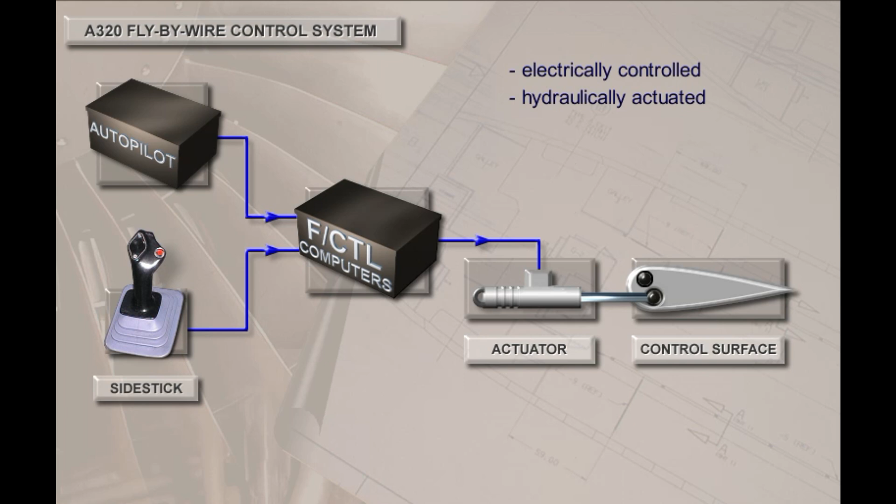Control surfaces on the A320 are conventional. Pitch control is achieved by two elevators mounted on a trimmable horizontal stabilizer. There are 5 spoiler panels and 1 aileron on each wing. Roll control is achieved by the ailerons and spoilers 2, 3, 4, and 5. In-flight speed brakes are provided by spoilers 2, 3, and 4, and ground spoilers are provided by all 5 spoiler panels on each wing. Yaw control is achieved by a one-piece rudder mounted on the vertical stabilizer.

The trimmable horizontal stabilizer, or THS, and the rudder, in addition to electrical control, are mechanically linked to cockpit controls to provide a means of controlling the aircraft should a temporary complete loss of electrical power occur.

Each wing has 2 trailing edge flap surfaces and 5 leading edge slat surfaces that act as lift augmentation devices for takeoff and landing.

The pitch trim wheels, flaps lever, speed brake lever, and rudder trim switch are located on the center pedestal. 2 sets of rudder pedals are located at each pilot station. Note, there is no aileron trim.

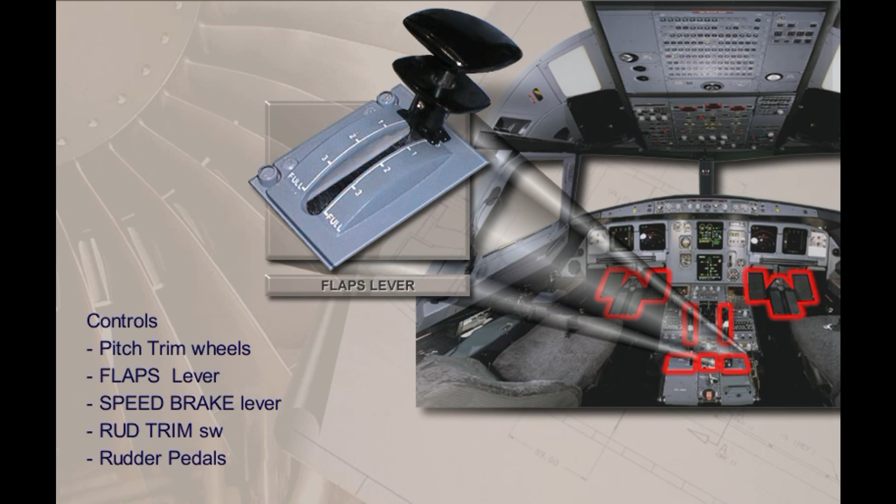The flaps and slats position indicator is found on the upper ECAM display unit. Additional flight control information is found in the memo section.

The traditional control column has been replaced by a side stick controller. The side stick, along with an auto trim system, enables the pilot to fly the aircraft more smoothly and with more precision and less effort, and provides a more comfortable ride for the passengers.

Inputs from the side stick or from the autopilot are processed by the flight control computers, which command the control surface actuators to move as necessary. This system enhances flight safety by providing complete protection against flight outside the normal flight envelope and protects against stall, wind shear, overstress, and overspeed.

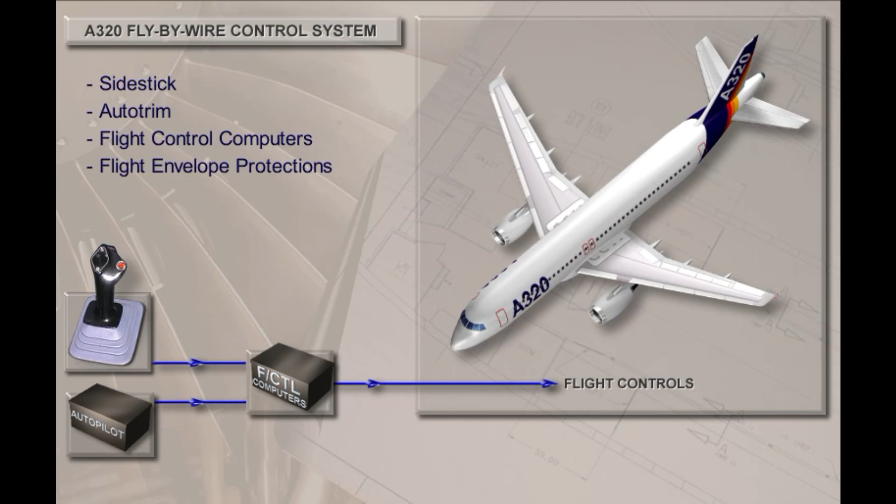The side stick controllers are located on the side consoles.

Flight control is achieved by 3 types of computers arranged to provide redundancy and failure protection. Different manufacturers, different hardware, and different software have been used to eliminate the potential for common errors. Electrical power sources are also from different electrical buses.

There are 2 elevator aileron computers, or ELACs, for elevator, stabilizer, and aileron control. 3 spoiler elevator computers, or SECs, for normal spoiler control and standby elevator and stabilizer control. 2 flight augmentation computers, or FACs, for electrical rudder control. 1 SEC, or 1 ELAC, is capable of controlling the aircraft in both the roll and pitch axis.

The electronic flight control switches are located on the left and right sides of the overhead panel.

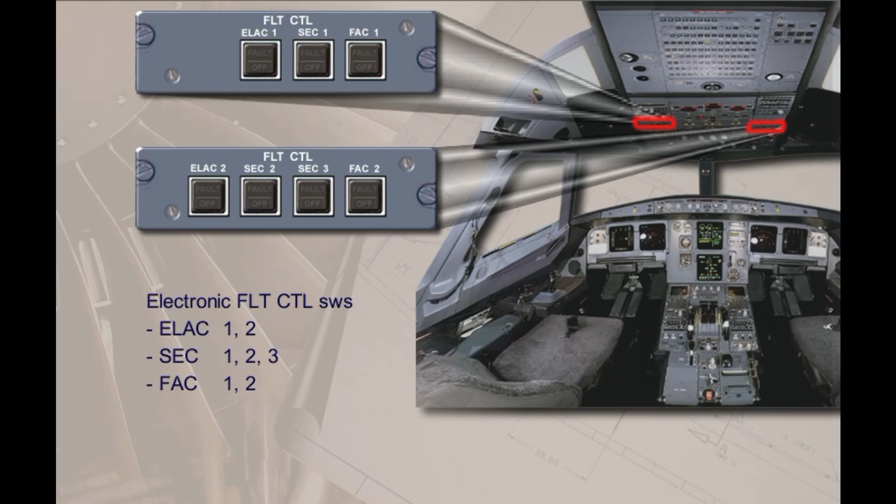The ECAM flight control page is displayed automatically with certain flight control faults and can be selected at any time with the flight control push-button switch on the ECAM control panel. The ECAM wheel page also duplicates the ground spoiler status.

Two side sticks allow the pilots to control the aircraft manually in both pitch and roll. They are not linked mechanically, but simultaneous inputs by the captain and first officer are summed. The sum is limited to the maximum deflection by a single side stick. It is very important, therefore, for both pilots to be clear about who has control of the aircraft.

There is no direct feedback or artificial feel system except for a simple spring centering device which neutralizes the side stick when it is released.

On the ground, after the first engine is running, the side stick position indicators come into view on the PFD. They disappear when the aircraft is airborne.

The white corner indices indicate the limit of side stick travel, while the white cross indicates the actual side stick order from both side sticks. This is useful for checking full side stick movement before takeoff, but does not indicate actual control surface position. For control checks, use the surface position indicators on the ECAM flight control page.

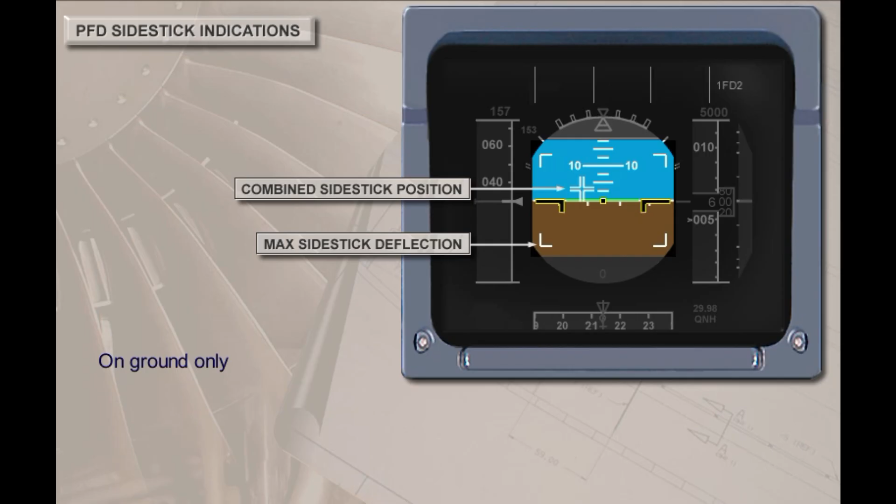The side stick has two switches, a dual-function autopilot disconnect priority takeover push button, and a communications push-to-talk switch.

Whenever the autopilot is engaged, a solenoid-operated detent locks the side stick in the neutral position. If necessary, the detent can be overridden with sufficient pressure to unlock the side stick, which will also disconnect the autopilot. The normal method to disconnect the autopilot, however, is to press the autopilot disconnect push button on the side stick.

A pilot can take full control and deactivate the other side stick by pressing and holding his priority takeover push button. If held for at least 40 seconds, the other side stick is latched out and the priority takeover push button can be released without losing priority. Each time a side stick priority is taken, an audio message, priority left or priority right, is heard.

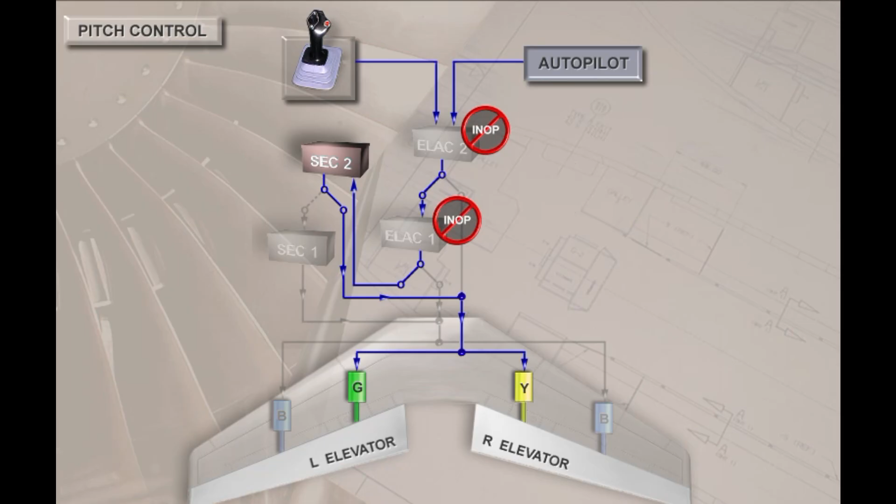The elevator position and hydraulic pressure indication is displayed on the ECAM flight control page. The hydraulic pressure indicator changes to amber when the associated actuator is not available due to hydraulic failure or jamming. The position indicator changes to amber when both actuators are unavailable. An amber partial box is displayed if the associated computer fails.

For pitch trim, the aircraft is equipped with a trimmable horizontal stabilizer, or THS. The THS is driven by two hydraulic motors, one powered by the green hydraulic system, the other by the yellow hydraulic system. For the auto pitch trim system, the hydraulic motors are driven by one of three electric motors, with the other two in standby.

Normally, ELAC 2 controls motor number 1. If ELAC 2 or any of its associated hydraulic systems or components fail, control automatically shifts to ELAC 1 and its associated hydraulic systems and components. If both ELAC 1 and 2 fail, control automatically shifts to SEC 2 or SEC 1, depending on the nature of the failure.

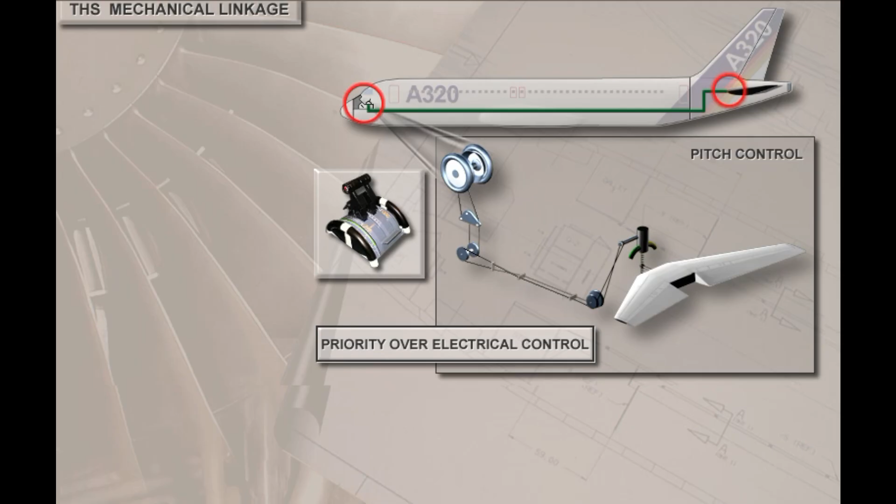With the failure of either the green or yellow hydraulic system, the trimmable horizontal stabilizer will operate at half speed with no adverse effects.

The trimmable horizontal stabilizer position is indicated on a scale next to the pitch trim wheel located on the center pedestal. The scale is painted green to indicate the normal takeoff range of 2.5 degrees nose down to 2.5 degrees nose up. The current setting is also displayed on the ECAM flight control page along with the hydraulic pressure indication, which changes to amber if hydraulic system pressure is low. The legend pitch trim changes to amber if the stabilizer is jammed.

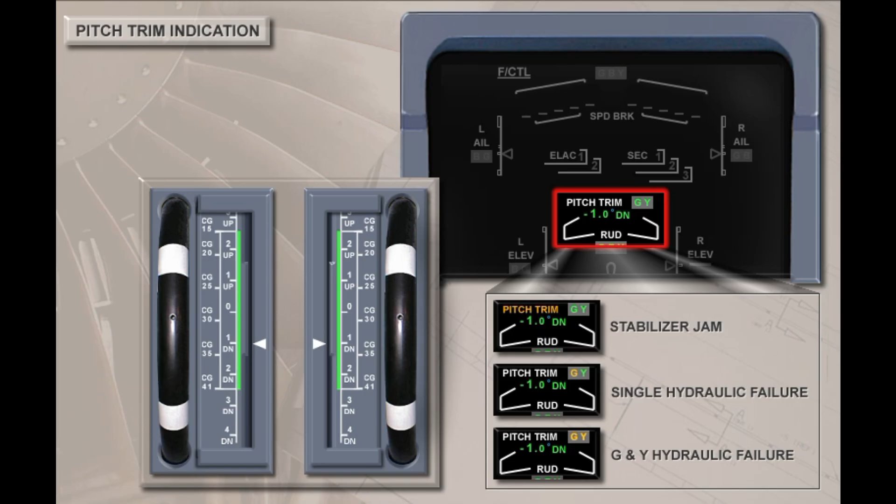One aileron and four flight spoilers on each wing provide roll control. Each aileron, as with the elevators, has two hydraulic actuators, each powered by a different hydraulic system and controlled by its associated ELAC. Normally, ELAC 1 and its associated actuators operate in active mode, while ELAC 2 and its associated actuators are in standby mode, ready to take over in the event of a failure.

Touch the ELAC 1 fail button or the right arrow to continue.

Each spoiler panel is positioned by a single servo jack and is powered by a combination of one of the three hydraulic systems and one of the three SECs.

If a SEC fails, control to its associated spoiler panel is lost and the spoilers are automatically retracted and hydraulically held down. If a hydraulic system failure occurs while a spoiler panel is extended, it will be blown down by aerodynamic forces.

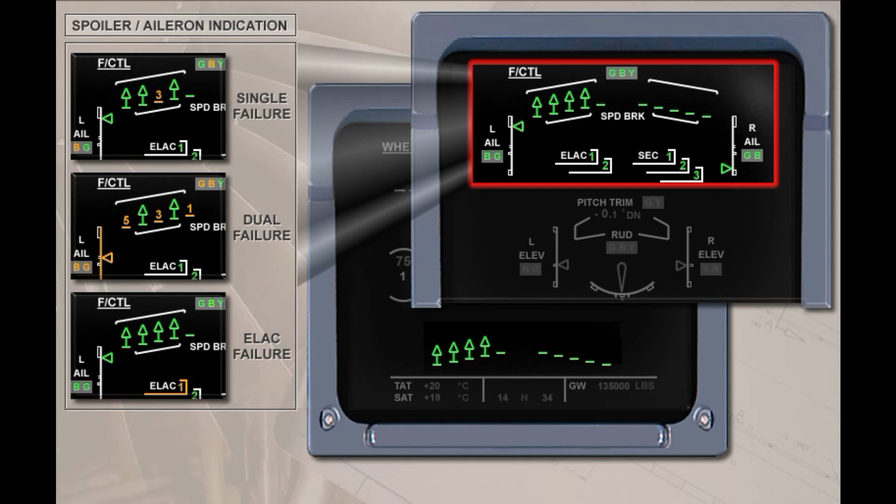Aileron and spoiler position indications are displayed on the ECAM flight control page. Spoiler indications are also repeated on the ECAM wheel page. A green arrow is displayed as soon as the spoiler panel is raised out of its retracted position. The hydraulic pressure indication turns amber if the hydraulic pressure is low or an actuator has jammed. An amber partial box is displayed if the associated computer fails or if the associated ELAC or SEC push-button switch is selected off.

Yaw control is provided by a single rudder panel driven by 3 independent hydraulic jacks operating in parallel. ELAC 1 computes yaw damping and turn coordination orders from the side stick, autopilot, or rudder pedals, and transmits these orders to FAC 1. FAC1 controls an actuator powered by the green hydraulic system, which in turn drives all 3 rudder hydraulic jacks. FAC2, along with a yellow actuator, operates in standby mode, ready to take over in case of a failure. There is no feedback to the rudder pedals from the yaw damping and turn coordination functions.

The 2 sets of rudder pedals are mechanically linked to each other and to the rudder itself, and are available in manual flight for takeoff, landing, and engine-out flight. Rudder and rudder pedal deflection is limited by the FACs as a function of aircraft speed to prevent overstressing of the airframe at high speeds.

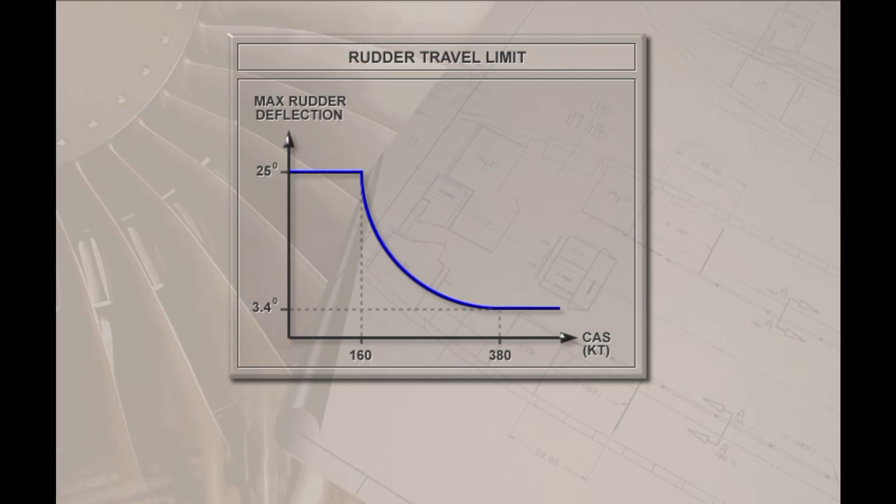Rudder trim is provided by 2 motors, one driven by FAC1, the other by FAC2. Normally, motor 1 is active, with motor 2 in standby. In manual flight with the autopilot off, rudder trim is applied with the rudder trim switch located on the pedestal, and is normally only used when an engine failure occurs. Using rudder trim causes displacement of the rudder pedals. A reset button allows the trim to be reset to 0. Note, with the autopilot engaged, the rudder trim rotary switch and rudder trim reset push button are not active.

Rudder position is displayed on the ECAM flight control page. The hydraulic indicator changes to amber with a hydraulic system failure. The rudder symbol and scale become amber if all 3 hydraulic systems pressures are low. The rudder trim position, normally blue, changes to amber if the rudder trim reset fails. The rudder travel limiter high-speed limits are displayed.

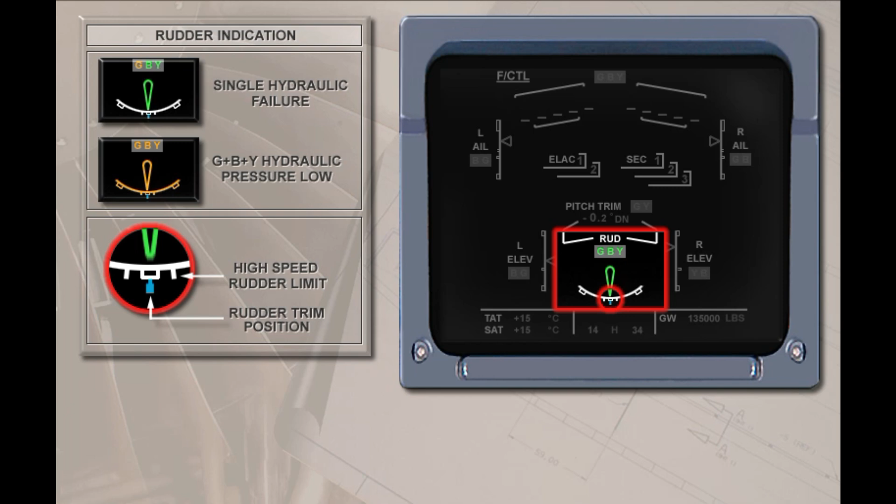Spoiler panels 2, 3, and 4 act as speed brakes in flight. However, the roll control function of the spoiler panels always has priority, and speed brakes may retract to satisfy a roll order. Spoiler panel 2 max deflection is half that of spoiler panels 3 and 4. Speed brakes are selected by pushing down and then moving the speed brake lever aft to the desired position. There is a detent at the half position. The speed brakes will not extend if the flaps are in config full, and if extended, will retract when config full is selected. Touch the speed brake lever to see the operation of the speed brakes.

The speed brakes are also inhibited if SEC 1 and SEC 3 both have faults, or angle of attack protection is active. If an elevator has a fault, spoilers 3 and 4 will be inhibited.

When the aircraft is flying faster than 315 knots, or Mach 0.75, and the autopilot is engaged, the speed brake retraction rate is reduced. It takes from about 25 seconds to 50 seconds for the speed brakes to retract, depending on aircraft modifications. On some aircraft, again depending on aircraft modification, when the autopilot is engaged, max speed brake panel deflection is reduced and is achieved with half speed brake lever selection.

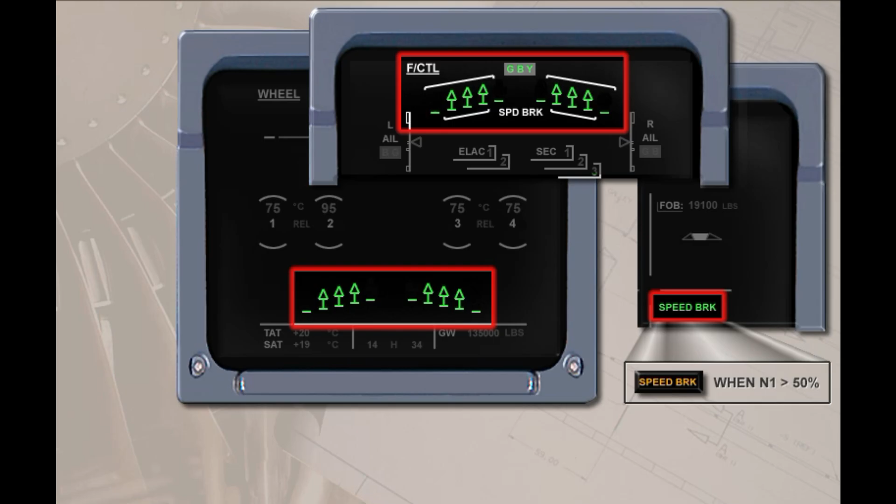All 5 spoiler panels act as ground spoilers. They are armed for takeoff and landing by raising the speed brake lever straight up into the armed position. The message ground spoilers armed appears on the upper ECAM.

The ground spoilers, when armed, extend automatically during a rejected takeoff when the aircraft speed is greater than 72 knots and both thrust levers are reduced to idle. On landing, the ground spoilers extend when both main landing gear touch down and the thrust levers are set to idle. If the ground spoilers were not armed for landing, they will extend automatically after both main gear have touched down when at least one engine is selected to reverse and the other is at idle.

On some aircraft, depending on modification, the ground spoilers will partially extend when reverse is selected on at least one engine and only one main landing gear strut is compressed. For example, in a crosswind landing, if the upwind gear touches down first and reverse is selected, the ground spoilers will partially extend to ease the other landing gear onto the runway. Consequently, full ground spoiler extension will occur.

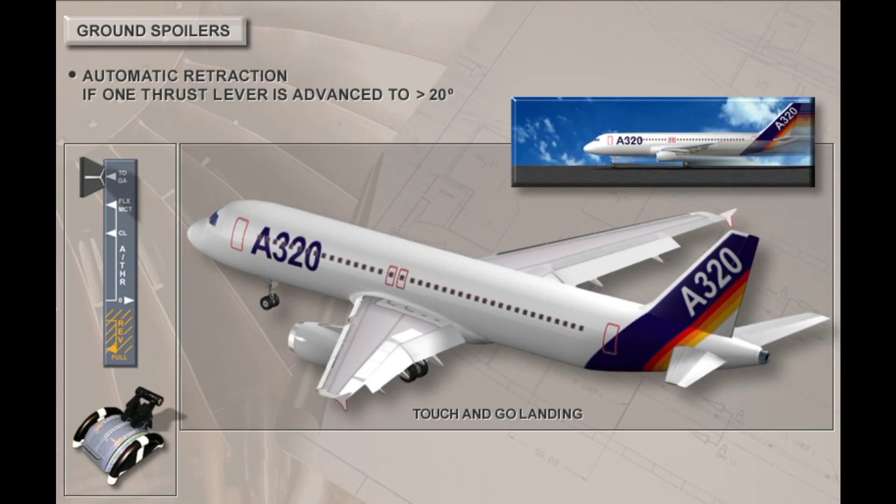When the ground spoilers extend, the speed brake lever does not move. The only visual indication that they have extended is on the lower ECAM wheel page, which was automatically displayed for landing or in the event of a rejected takeoff.

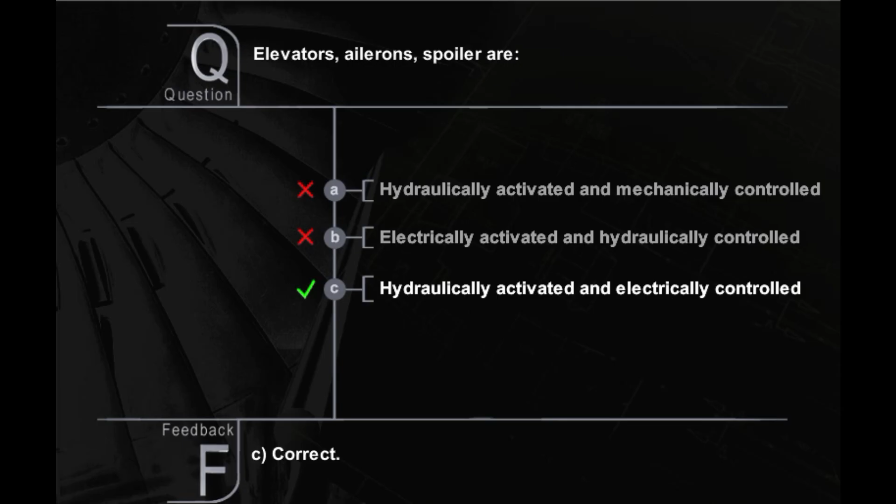Each wing has 5 leading edge slat surfaces and 2 trailing edge flap surfaces. Slats and flaps are selected by a single flaps lever located on the center pedestal. Touch the flaps lever to select full flaps.

Two dual-channel slat flap control computers, or SFCCs, monitor and control the slats and flaps. When a flap selection is made with the flaps lever, a signal is sent to the SFCCs, which in turn control the slats and flaps power control units, or PCUs. Each SFCC controls and monitors one motor of the flap PCU and one motor of the slat PCU. These hydraulic motors, through a mechanical system of shafts, gearboxes, and actuators, move the slats and flaps to the desired position. When the slats and flaps have reached their selected position, pressure off brakes, or POBs, lock the hydraulic motors to prevent unwanted movement.

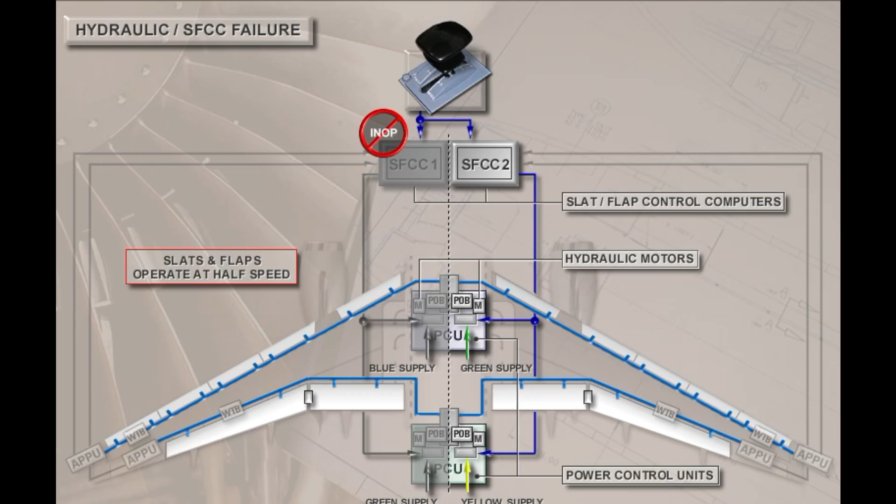The SFCCs continuously monitor asymmetry position pickoff units, or APPUs, and feedback position pickoff units, or FPPUs, which measure slat and flap position for asymmetry, runaway, uncommanded movement, and other failure conditions. If both SFCCs detect a failure, the wingtip brakes, or WTBs, lock the slats, or flaps position, and send a warning to the ECAM. Wingtip brakes, once activated, can only be reset on the ground.

Two indication position pickoff units, or IPPUs, one for the slats and one for the flaps, send position data to the upper ECAM slats flaps position indicator.

There is an interconnecting strut with flap attachment failure detection sensors between the inboard and outboard flaps. If a position difference is sensed, a signal is sent to one of the landing gear control interface units, or LGCIUs, and the movement of the flaps is stopped by the pressure on brakes.

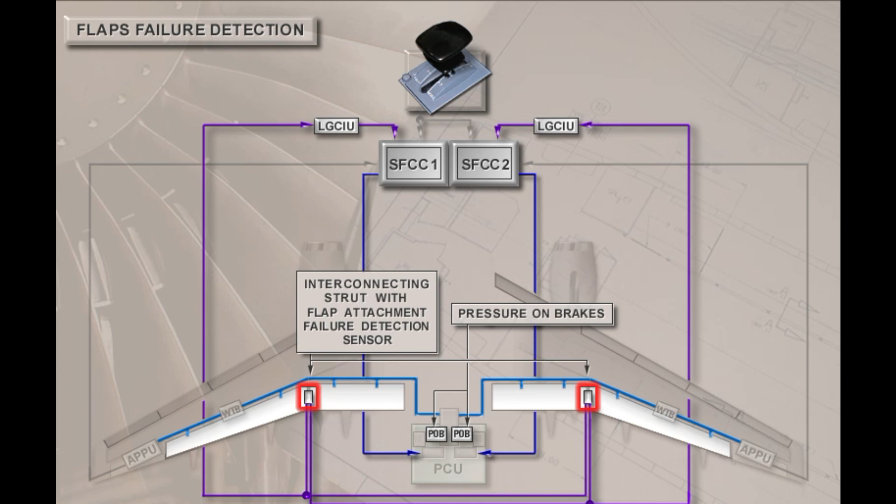The flaps lever has 5 detents, 0, 1, 2, 3, and full, corresponding to the different slat flap configurations. Below the flap lever knob is a collar, which must be lifted in order to move the lever out of each detent. There is an internal balk between positions 1 and 2, and between positions 3 and full.

To move past a balk, the collar must be released, then squeezed again, preventing an excessive one-movement selection from full in the event of a go-around, and from 2 to 0 during normal retraction.

The flap indicator on the upper ECAM uses the shape of the wing to display slat flap configuration. A gray symbol represents the fixed wing center section, and the slats and flaps are represented by green triangles on either end of the wing.

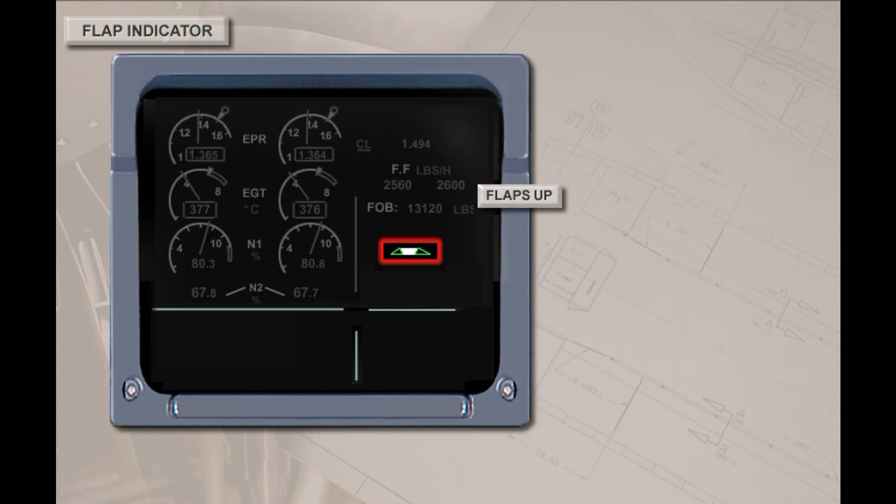With the first flap selection, white dots and an S and F appear to show the possible slat flap configurations. The legend flap and the selected flap lever position is displayed in cyan, and small cyan triangles move out to the selected position. When the slats flaps reach their new position, the flap legend changes from cyan to white. The selected flaps lever position changes from cyan to green, and the cyan triangles are replaced with green position indicators.

The chart shows the possible slat flap configurations. When config 1 is selected for takeoff on the ground, both slats and flaps extend. When config 1 is selected in flight, only the slats extend, and the flaps will then extend when the lever is selected to the config 2 position.

After takeoff with config 1 plus F, the flaps only will automatically retract at 210 knots to prevent exceeding the max flap extension speed of 215 knots. This may occur at high aircraft gross weights where the slat retraction speed is close to 210 knots. After an automatic retraction, automatic re-extension does not occur if the speed again drops below 210 knots.

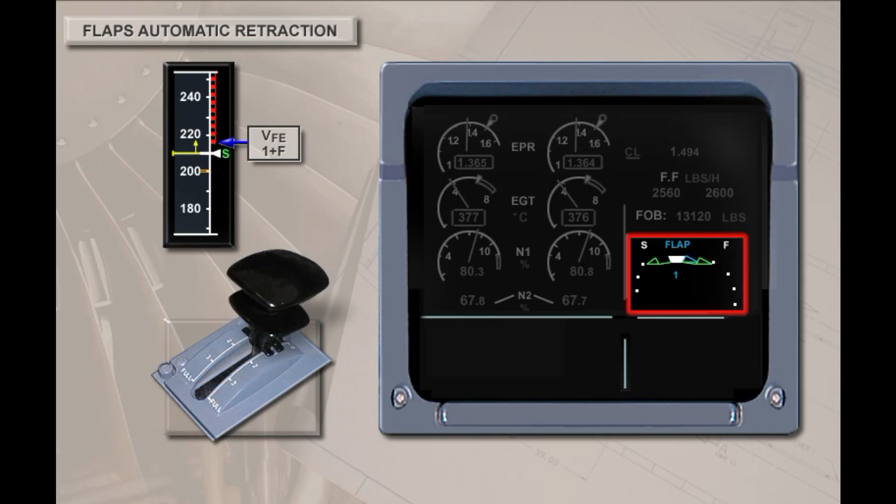When the flaps are extended, the ailerons droop 5 degrees. This position is indicated on the ECAM by an index on the aileron scale.

If both associated hydraulic systems are inoperative, or there is a fault in the slats or flaps, the flap legend and the position indicators change to amber. The slats locked message or the flaps locked message is displayed along with an ECAM caution when the wingtip brakes are engaged or when there is an asymmetry condition between the slats or flaps.

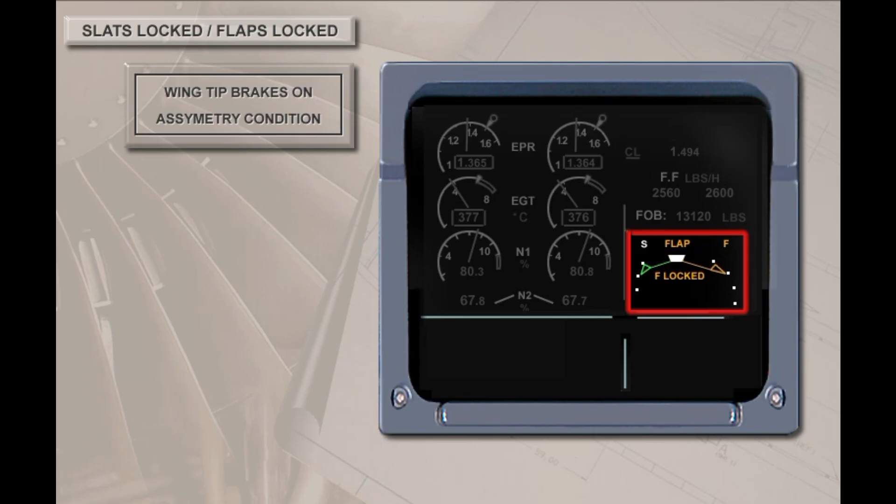An alpha speed lock function prevents slat retraction at high angles of attack and low speeds to guard against stall. If angle of attack exceeds 8.5 degrees or the airspeed is less than 148 knots, slat retraction from position 1 to 0 is inhibited. When the flaps lever is moved from 1 to 0 under these conditions, the flaps only will retract. The slats will eventually retract when the speed increases to VLS for config 0. Note, slats do not automatically extend if angle of attack is exceeded or if airspeed falls below 148 knots.

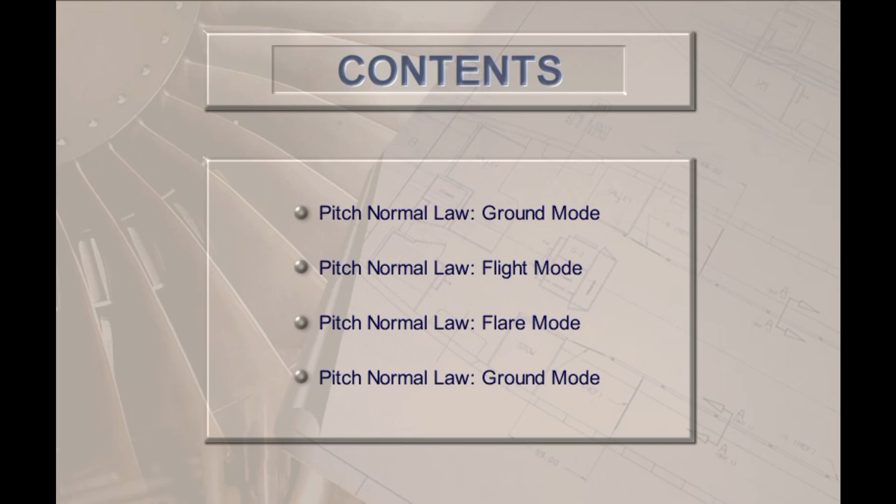All aircraft fitted with fly-by-wire control systems have within the flight control computers control laws which determine how the aircraft's flight control surfaces should be positioned at any given time.

On the A320, normal law is active when all flight control surfaces function, even after certain flight control computer, hydraulic, or electrical faults. Protections are provided in flight, including load factor limitation, pitch attitude protection, angle of attack protection, high speed protection, bank angle protection, low energy warning, and load alleviation protection. Normal law encompasses 3 modes: ground mode, flight mode, and flare mode.

On the ground, because sophisticated protections are not required, elevator deflection is in direct proportion to side stick movement. Auto trim is not functional, allowing the pilots to set the trimmable horizontal stabilizer manually for takeoff to adjust for C of G variations.

Ground mode allows the elevators to move to the max deflection of 30 degrees nose up and 15 degrees nose down in order to perform the pre-flight control check. Upon reaching 70 knots during the takeoff roll, max nose up elevator deflection is reduced to 20 degrees to prevent the possibility of a tail strike at rotation.

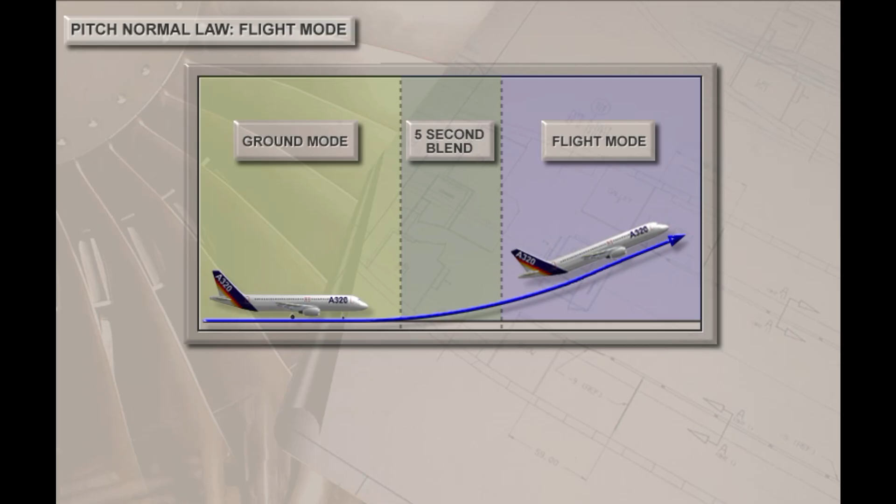In pitch normal law, movement of the side stick either fore or aft results in a load factor demand or constant G maneuver rather than a directly proportional elevator displacement. With the side stick in the neutral position, the pitch demand is always to maintain a constant 1G. If the aircraft is disturbed due to atmospheric influences, for example, it will always attempt to return to its original pitch attitude and 1G. A conventional aircraft, once disturbed, would continue to diverge from its original flight path, at least in the short term.

Moving the side stick aft results in a demand greater than 1G or positive G, and moving it forward results in a demand for less than 1G or negative G. Once the aircraft is established in the desired attitude, the side stick can be released to its neutral position, and the aircraft will continue to maintain the new attitude and 1G. Control inputs are made to alter or change the flight path, not to maintain it. Therefore, a side stick input can be considered as a selected vector through space.

In normal law, pitch trim is automatic. With prolonged side stick input, the trimmable horizontal stabilizer is automatically trimmed to bring elevator deflection back to zero. Also, with the side stick in neutral, power, speed, or configuration changes are automatically trimmed out to maintain a constant 1G. The aircraft will decelerate or accelerate in level flight with no pilot input, all the while maintaining 1G. Without auto trim, the aircraft would pitch up or down just as it does in a conventional aircraft.

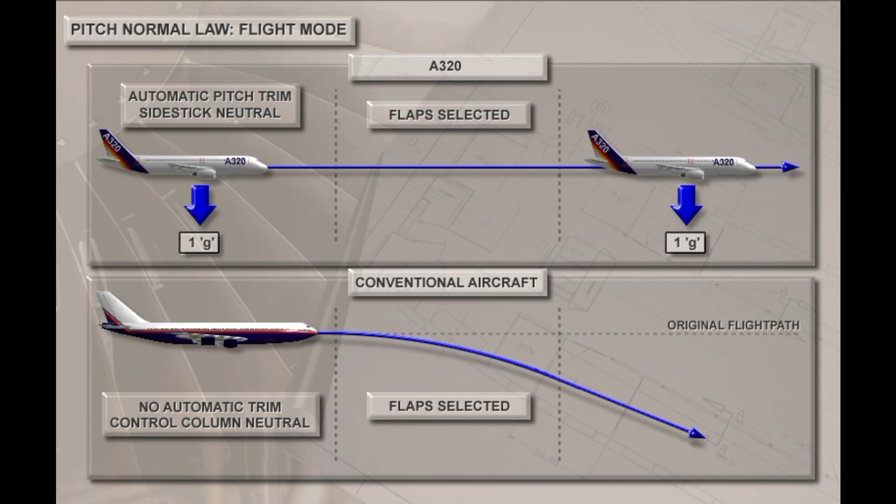In a turn of up to 33 degrees of bank, the pilot does not have to hold back pressure on the side stick to maintain altitude. Once the turn is established, the side stick can be released to neutral.

As the aircraft descends through 50 feet for landing, flight mode changes to flare mode, a modified form of pitch normal law. The aircraft memorizes the pitch attitude at 50 feet, then at 30 feet, begins to progressively reduce the pitch attitude to -2 degrees over a period of 8 seconds. The auto trim is also deactivated. This simulates the behavior of a conventional aircraft as it becomes influenced by ground effect and means that the pilot must apply a conventional flare technique, moving the side stick aft to achieve the correct landing attitude for touchdown.

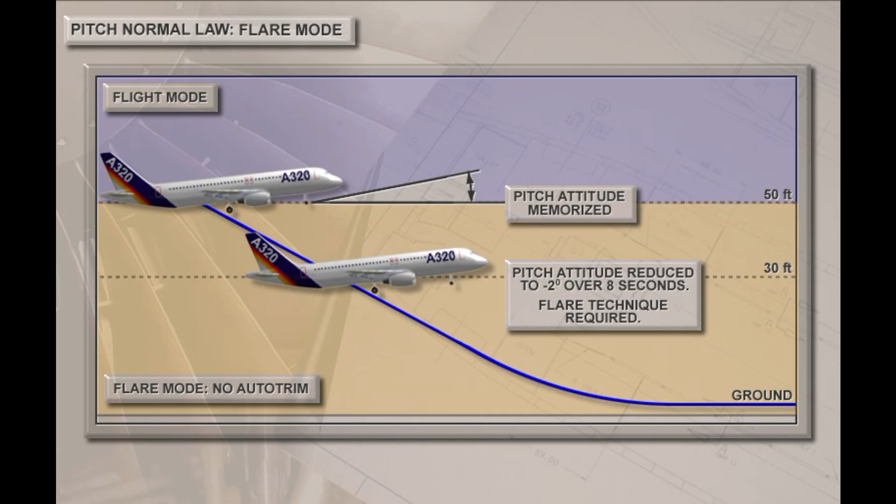If a go-around is attempted below 50 feet, flight mode and therefore auto trim would not be restored until reaching 50 feet, and more than normal pitch force may be required to pull the aircraft up to and maintain the go-around attitude.

Upon touchdown, elevator deflection is again restored to a direct elevator-side stick relationship. 5 seconds after touchdown, the trimmable horizontal stabilizer is automatically reset to 0 degrees.

In pitch normal law, side stick inputs are filtered through a limiter, which will restrict the nose up or nose down demands to maintain the aircraft within its structural design limits at all times. The load factor is limited to plus 2.5 Gs to minus 1 G with the flaps retracted. With the flaps extended, load factor is limited to plus 2 Gs to 0 G.

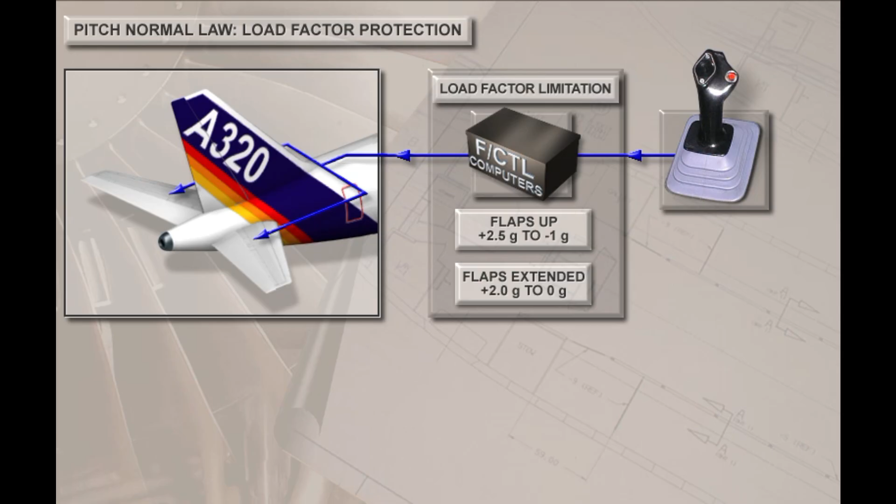Load factor is momentarily displayed on the lower ECAM whenever the G load is above 1.4 Gs or below 0.7 G.

Pitch attitude is limited to a maximum of 30 degrees nose up in config 0 to 3, progressively reduced to 25 degrees at low speed, and with the flaps in the full position is limited to 25 degrees nose up, progressively reduced to 20 degrees at low speed. Nose down pitch attitude is limited to minus 15 degrees. These limits were chosen to avoid entering the angle of attack and high-speed protection envelopes, which will be covered later.

If flying at the nose-up limitation, pulling back further on the side stick has no effect, however full nose-down demands are still available. At the nose-down limitation, the reverse is true: pushing further on the side stick would have no effect, but full nose-up authority is available.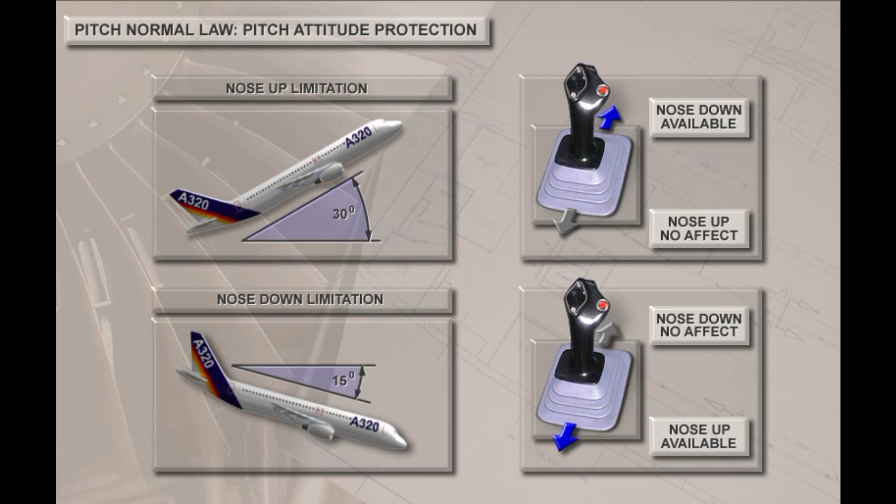Pitch attitude limits are displayed on the PFD as small green horizontal bars. As well, a large red arrow pointing downward is displayed at the nose-up limit. The flight director bars disappear from the PFD when pitch attitude exceeds 25 degrees nose up or 13 degrees nose down.

At the low end of the speed scale, an aircraft may reach an angle of attack at which max lift is attained. This is defined as max coefficient of lift, or alpha CL max. At higher angles of attack, lift is reduced and the aircraft will eventually stall. Conventional aircraft utilize systems such as stick shakers or stick pushers to give pilots warning of an impending stall.

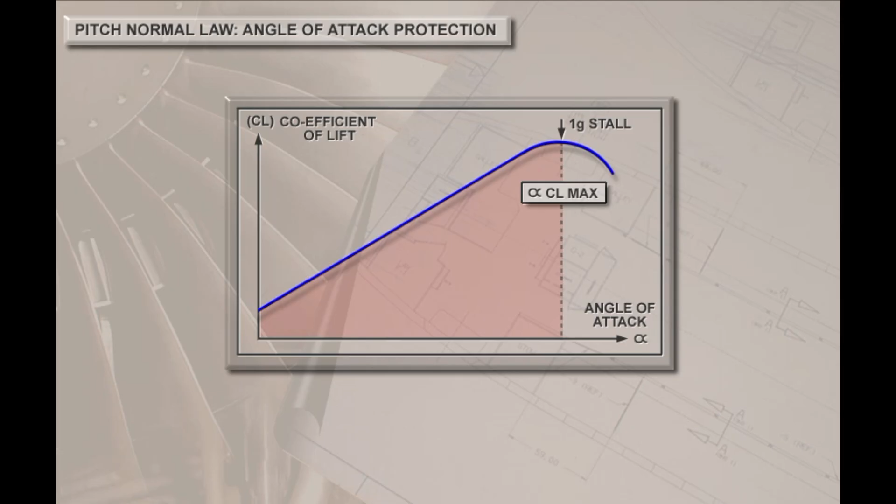When the A320 reaches an angle of attack defined as alpha protection or alpha prot, the side stick controller, rather than demanding a load factor, switches to a protection mode in which it directly demands angle of attack. At an angle of attack of alpha prot plus 1 degree, the autopilot will disengage.

The second level of protection is that, at alpha floor, a speed slightly lower than alpha prot, TOGA thrust is automatically applied, regardless of thrust lever position or whether the auto thrust is engaged. Alpha floor is enunciated on the FMA.

The third level of protection is that the angle of attack will not be allowed to exceed alpha max, even if the pilot pulls the side stick all the way back. It is safe, therefore, if required for wind shear or terrain clearance maneuvers, to rapidly pull the side stick fully back, even at low speeds.

The load factor limitation still applies. If the side stick is released, the angle of attack returns to alpha prot and stays there. Alpha prot, alpha floor, and alpha max are computed by the flight augmentation computers or FACs and vary depending on aircraft weight, configuration, and C of G.

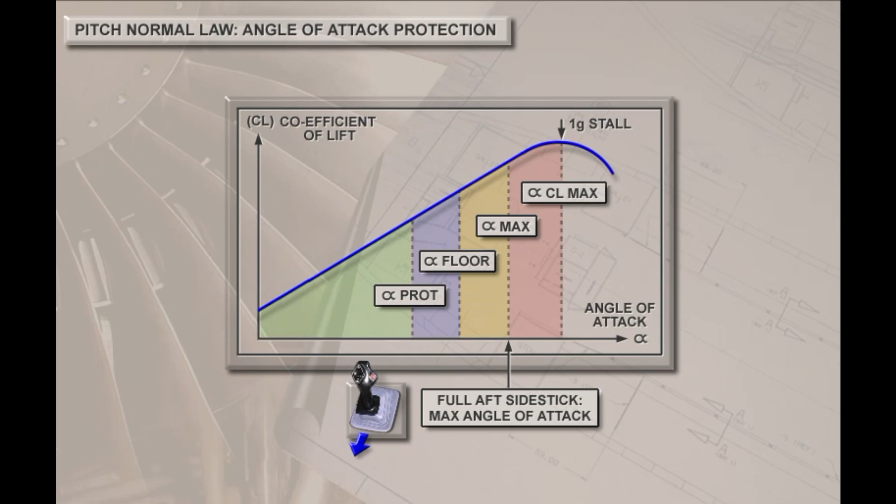To exit alpha protection, the side stick must be pushed forward. When the aircraft exits alpha floor conditions, alpha floor will be replaced by the message TOGA LOCK on the FMA. To cancel TOGA LOCK, the auto thrust must be disconnected by pressing the auto thrust disconnect push button or the auto thrust push button on the FCU panel. Then, bring the thrust levers back into the auto thrust operating range and rearm the auto thrust by pressing the auto thrust push button on the FCU panel.

On the PFD speed scale, alpha prot is represented by the top end of the black and amber strip, while alpha max is represented by the top of the red strip. VLS is the lowest selectable speed, which can be selected by the pilot with the speed select knob on the FCU and represents 1.28 times Vstall in the clean configuration. It provides a buffer against reaching alpha prot. With auto thrust engaged, the speed will not normally be allowed to fall below VLS.

Angle of attack protection is also available at high altitude and high speed, where it gives protection at the buffet boundary. At altitudes higher than optimum, for a given weight, the spread between alpha prot and actual aircraft speed can be quite small.

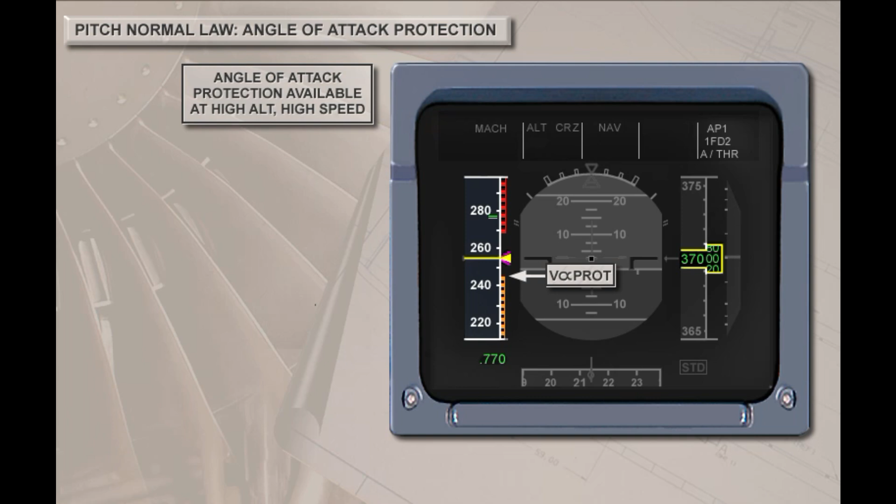The high-speed protection system will not allow the aircraft to exceed its design limit speed of 383 knots, Mach 0.89. At VMO, max operating speed in level flight plus 6 knots, or MMO plus 0.01, the autopilot disconnects, and a nose-up load factor demand is introduced to allow the aircraft to return to the normal speed envelope.

VMO, MMO is indicated on the PFD speed scale by a red and black strip, and the high-speed protection symbol is indicated by a pair of green horizontal bars.

If the pilot gently applies full forward side stick input and holds it there, the speed will stabilize at a maximum of VMO plus 16 knots, or MMO to MMO plus 0.04. If he suddenly applies full forward side stick and holds it there, the speed may momentarily increase to a limit of VMO plus 30 knots, then will stabilize at VMO plus 16 knots. If the stick is released to neutral, the speed will stabilize at VMO or MMO.

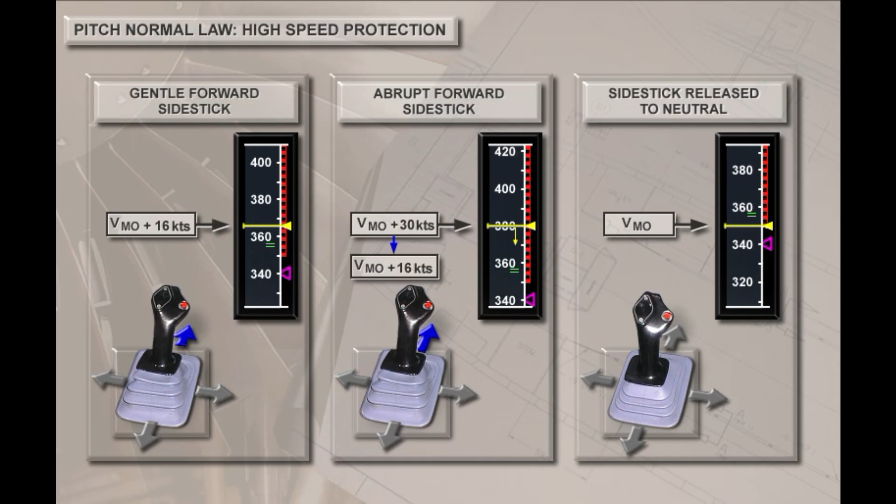When high-speed protection is active, the autopilot disconnects, and the horizontal stabilizer stops auto-trimming, with only elevator used to bring the aircraft back to within the normal speed envelope.

When the aircraft enters the high-speed protection area, an overspeed warning is generated to ECAM, the continuous repetitive chime is heard, and the master warning flashes. The autopilot off warning is also displayed if the autopilot was on.

Between 2,000 feet and 100 feet, with flaps in config 2, 3, or full, the low-energy warning is triggered if the aircraft speed drops below a threshold where power must be increased to maintain the flight profile. The oral warning, speed, speed, speed, is repeated every 5 seconds.

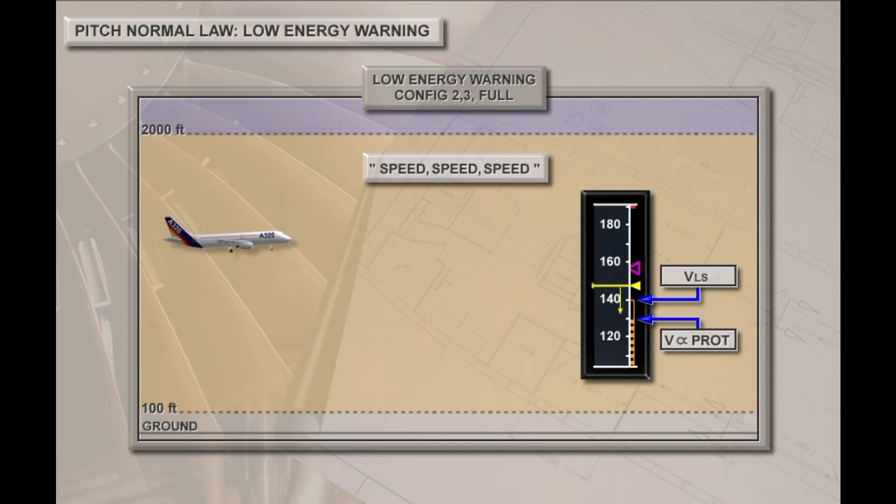Moving the thrust levers forward of the climb detent up to the MCT detent will allow the thrust to increase in order to recover small decreases in speed. This action deactivates the auto thrust, although it remains armed, and gives an immediate burst of power. Once the speed is recovered, bringing the thrust levers back to the climb detent will reactivate the auto thrust. If necessary, move the thrust levers to the toga position to initiate a go-around.

The transition from ground to flight mode occurs 1/2 second after the aircraft becomes airborne. In flight, the side stick demands a roll rate rather than a direct aileron spoiler deflection. The rate of roll is proportional to the amount of lateral side stick input, with a maximum rate of 15 degrees per second if held to the stop.

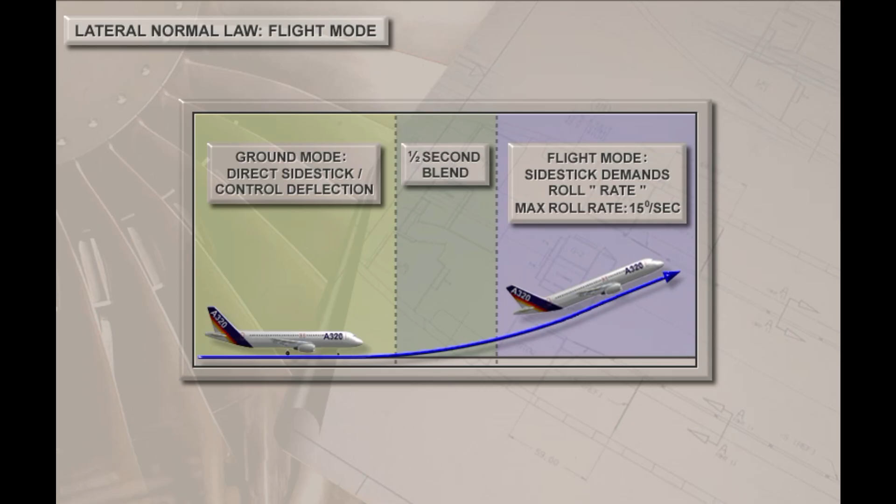The lateral normal law is combined roll and yaw law. Thus, a side stick input mixes orders to the ailerons, spoilers, and yaw damper.

The side stick also gives a bank angle demand when it is released to neutral. Stick neutral is a demand for zero roll rate. Thus, in a bank of up to 33 degrees, the aircraft will maintain the bank angle at the time the stick was released. Also, feedback to the pitch normal law is made, such that up to 33 degrees of bank, an increased G demand is made to compensate for the bank angle, and no additional back pressure is necessary on the side stick while in the turn.

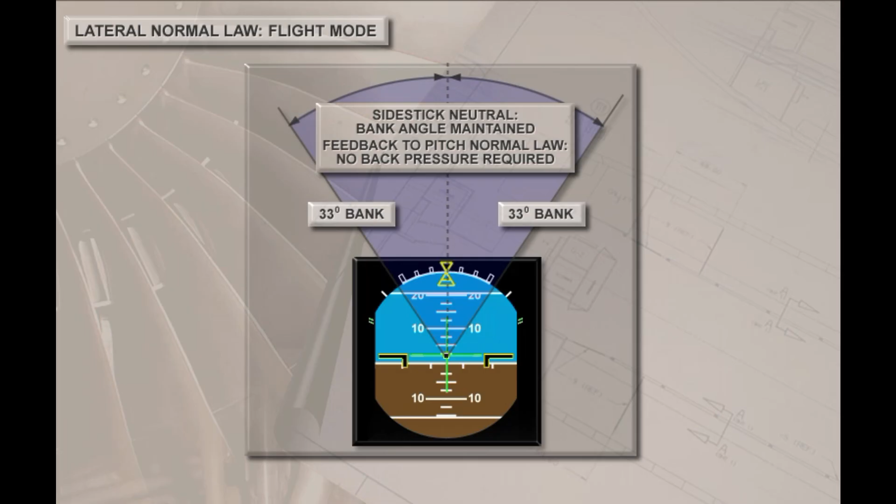If the rudder pedals are depressed when the side stick is in the neutral position, the lateral controls attempt to zero the roll rate, and a side slip is automatically performed. The aircraft trajectory does not change significantly. This is an important technique for crosswind landings.

In the engine failure case, if the side stick is left in neutral, the aircraft attempts to zero the induced roll rate by automatically displacing the ailerons, spoilers, and rudder. However, a slow heading drift will occur as the aircraft rolls and yaws in response to the engine failure, and pilot action on the rudder pedals is required to stop the heading drift and bring the aircraft back to the ideal state of side slip. That is, wings level, ailerons and spoilers neutral, with rudder displacement only.

To assist the pilot, a side slip target indicator is available on the PFD. The color changes from yellow to blue, with flaps at 1, 2, or 3. Pilot response is instinctive, as with a conventional slip ball, step on the target to align it with the roll index.

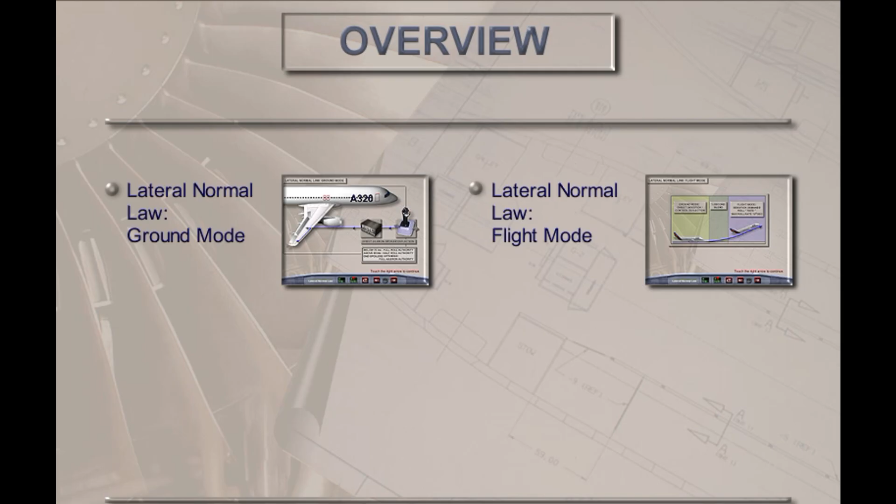The maximum bank angle that can be achieved is 67 degrees. Full lateral side stick must be applied and held. If the side stick is released, the aircraft will return to and maintain 33 degrees of bank. Beyond 33 degrees of bank, there is no pitch compensation. Aft control inputs would be required, as in a conventional aircraft, to maintain the desired pitch angle.

The max bank angle of 67 degrees is indicated on the PFD by a pair of green bars. When the bank angle exceeds 45 degrees, the flight director bars disappear. The bank angle limitation of 67 degrees corresponds to the design G factor limitation of 2.5 Gs. With flaps extended, the bank angle is limited to 60 degrees in level flight to correspond with the design factor limitation with flaps extended of 2 Gs.

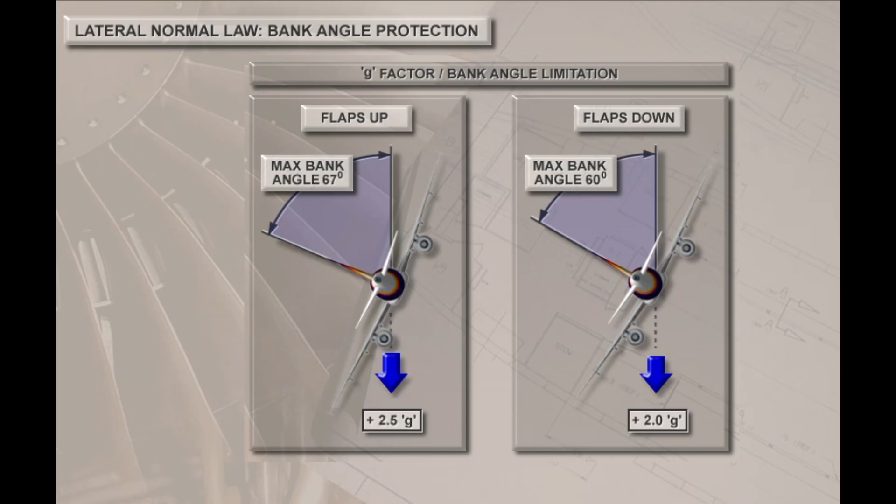When high speed or angle of attack protection is active, the maximum angle of bank is limited to 45 degrees. If the side stick is released to neutral, the aircraft will return to and maintain wings level.

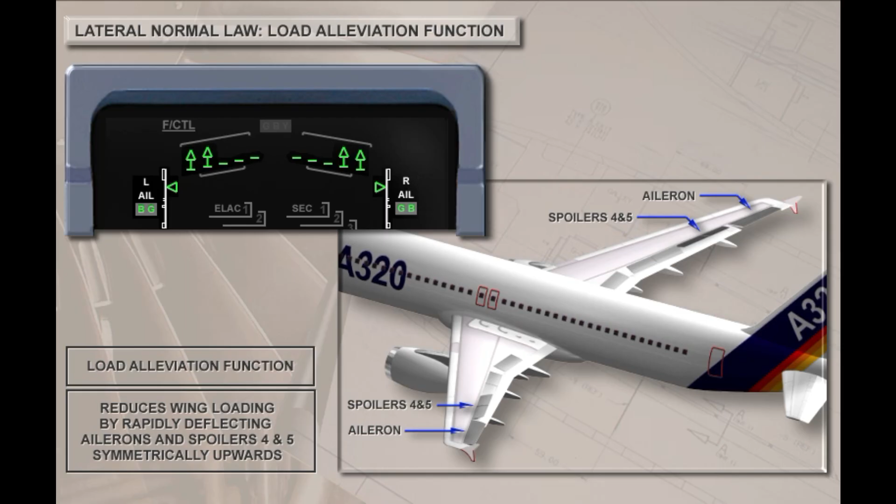The load alleviation function, or LAF, reduces wing structure loads in conditions of turbulence by rapidly deflecting the ailerons and spoilers 4 and 5 symmetrically upwards when the aircraft load factor differs by 0.3 G compared to aircraft demanded load. To assist with the high hydraulic demands required, dedicated hydraulic accumulators are installed near the associated controls. LAF is inhibited with slats or flaps extended below 200 knots or above VMO plus 10 knots.

The load alleviation function operates in a degraded mode with associated failures. The LAF degraded message appears on the ECAM flight control page. With a total loss of the load alleviation function, LAF is displayed in the INOP Systems column on the ECAM status page.

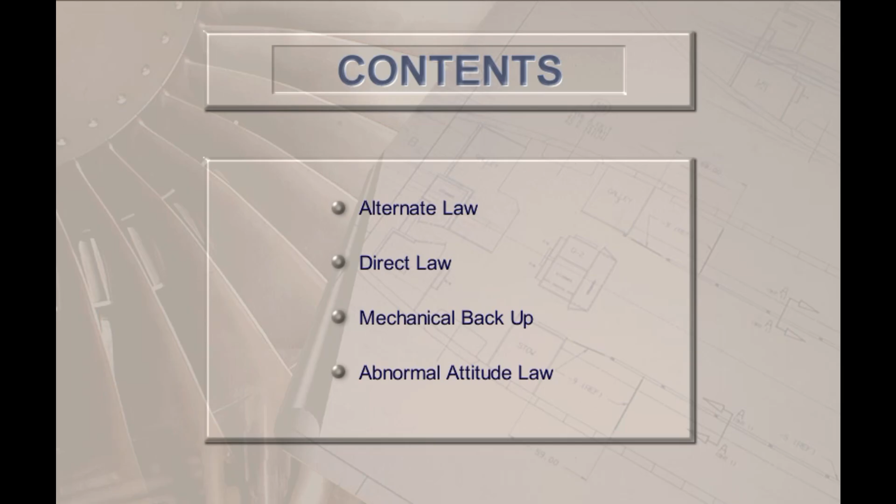With certain hydraulic system failures, control surface failures, or electronic flight control system, inertial reference, and/or air data computer failures, normal law characteristics and protections may be reduced or lost, and the aircraft will revert to alternate law. Therefore, it is imperative that the pilot fly the aircraft more attentively to avoid exceeding normal flight parameters. ECAM will advise the pilot whenever alternate law is active. The autopilot may or may not be available, depending on the nature of the failure.

In pitch alternate law, as in normal law, the side stick still demands a G maneuver and auto trim is still available. Thus, pitch control in alternate law is very similar to normal law. However, the only protection available is the load factor limitation. With no pitch attitude protection, amber X's replace the double green pitch attitude limit bars on the PFD.

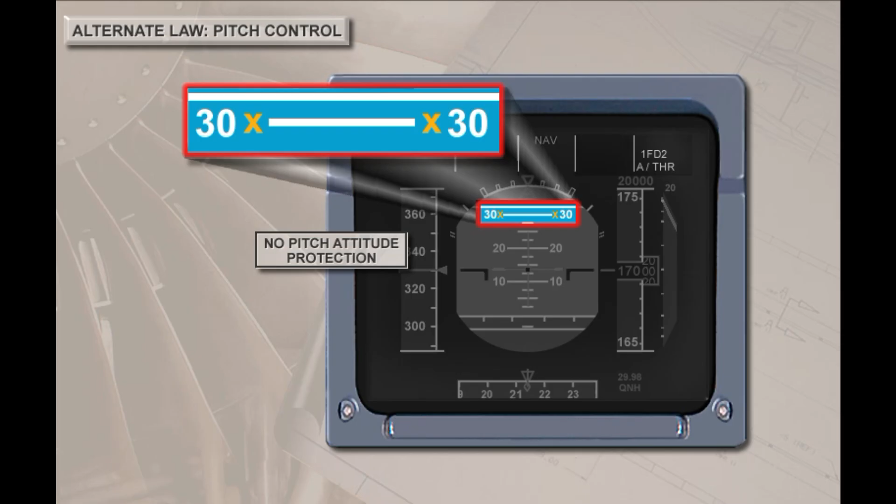Because of the lack of high-speed protection, and to give the pilot more time to react to an overspeed condition, the high-speed envelope is further reduced to 320 knots Mach 0.77. The system introduces a nose-up demand to avoid excessive speed, but may be overridden by the pilot. This limitation is displayed on the PFD speed scale by the black and red VMO strip. In addition, there is an oral overspeed warning at VMO plus 4 or MMO plus 0.006.

At the low end of the speed envelope, a nose-down pitch order is added, starting at 5 to 10 knots above the stall. That will gently push the nose over in order to keep the speed from decreasing further. If the pilot continues to pull the stick back, the aircraft will stall, since angle of attack and alpha floor protections are not available. An oral stall warning is generated at an appropriate margin above the stall.

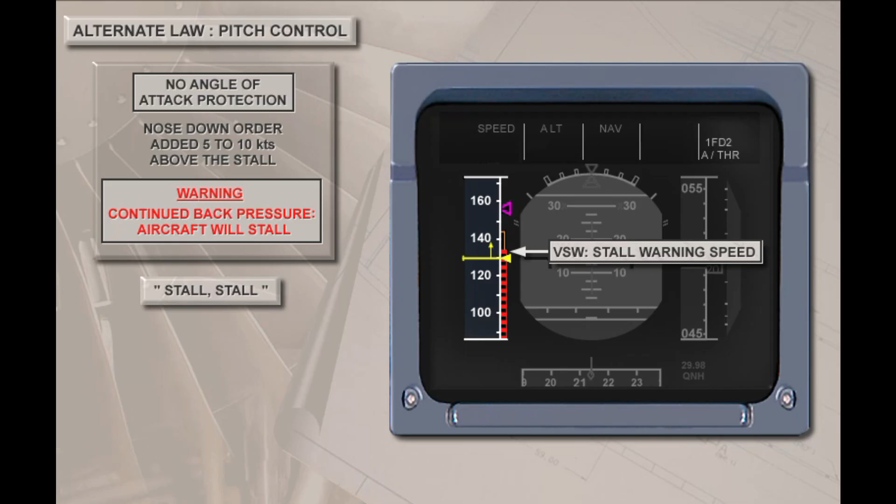The PFD speed scale presentation changes in alternate law. VSW, stall warning speed, rather than alpha prot and alpha max, is displayed at the top of the red and black band. It is also possible, with a combination of failures, to have alternate law without any kind of low speed or high speed protections. However, the load factor limitation is always available.

In alternate law lateral control, aileron spoiler deflection is always in direct proportion to side stick deflection. Along with the ailerons, only spoilers 4 and 5 are used in order to reduce the roll rate to a comfortable value. If spoiler 4 fails, spoiler 3 is available, and if the ailerons fail, all roll spoilers become active. Yaw damping is still available.

However, in manual flight, turn coordination must be accomplished through pilot action on the rudder pedals. Bank angle protection is not provided. Amber X's replace the double green bars on the PFD.

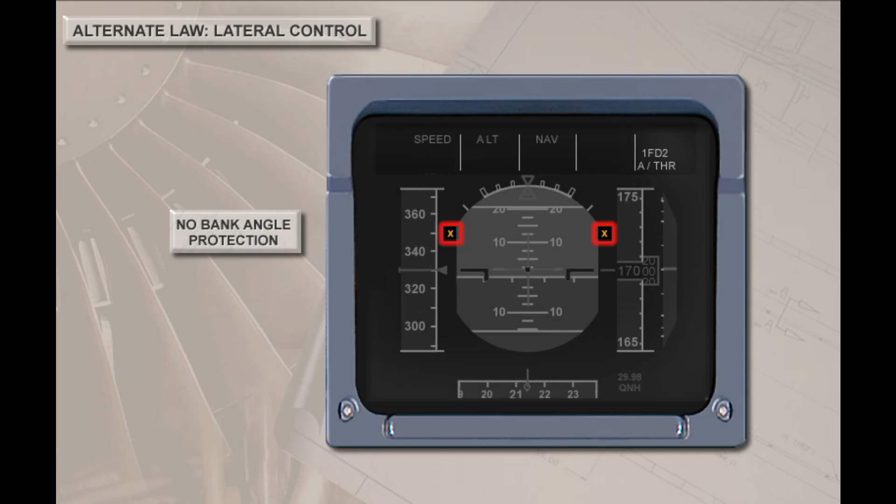Direct law becomes active when, for example, there is a triple inertial reference system failure, or both radio altimeters have failed and the landing gear is selected down. Also, in all cases where alternate law is the active law, as soon as the landing gear is lowered, direct law becomes active. The only exception to this activation of direct law is when alternate law has been activated from an abnormal attitude, which does not put the aircraft into direct law when the landing gear is lowered. Direct law in flight is extremely rare and usually momentary until the crew isolates the associated failed systems.

In direct law, both pitch and lateral control is a direct side stick to control surface relationship. There are no protections in direct law. However, aural overspeed and stall aural warnings are still available. The autopilot, yaw damping, and turn coordination are not available, therefore yaw must be controlled with rudder pedal input.

In direct law, auto trim is lost and trim changes due to speed and configuration changes must be trimmed manually with the pitch trim wheel. The message Use Manual Pitch Trim is displayed in amber on the PFD as a reminder.

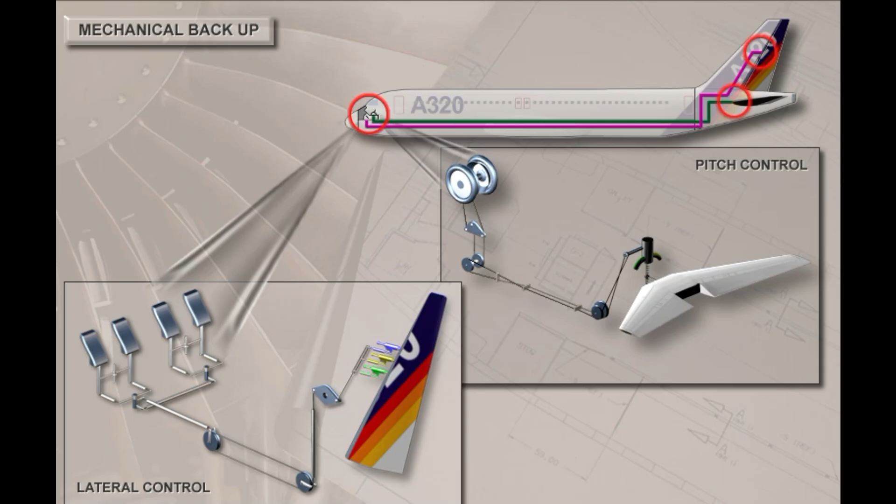Mechanical backup allows the pilot to control the aircraft in the event of a temporary complete loss of electrical power, complete loss of all 5 flight control computers, or complete loss of elevators, ailerons, and spoiler control. In pitch, this is done by manually moving the horizontal stabilizer by means of the pitch trim wheel. For lateral control, the pilot uses the rudder pedals. On the PFD, the message Manual Pitch Trim Only is displayed in red, except in the case of complete electrical loss.

If the aircraft is thrown out of control due to, for example, mid-air collision or clear air turbulence, the abnormal attitude law allows the pilot to bring the aircraft back to within the normal flight envelope.

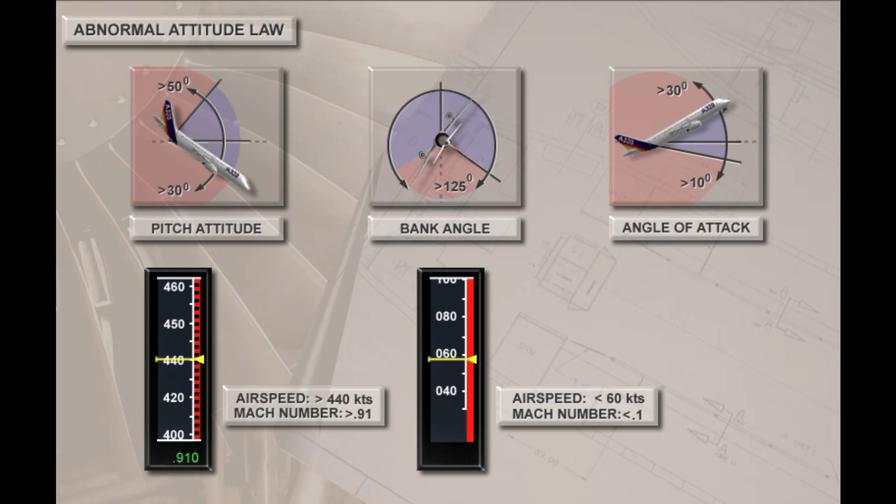The law becomes active when the aircraft exceeds any of the following limits: pitch attitude greater than 50 degrees nose up or 30 degrees nose down, bank angle greater than 125 degrees, angle of attack greater than 30 degrees or less than minus 10 degrees, airspeed greater than 440 knots or Mach number greater than 0.91, airspeed less than 60 knots or Mach number less than 0.1.

The abnormal attitude law in pitch is similar to alternate law with no protections except load factor protection. Also, auto trim is inhibited when the aircraft is outside of its normal flight envelope. The lateral abnormal attitude law is full direct law with mechanical yaw control only.

When the aircraft returns to level flight, pitch alternate law without protections and lateral direct law with yaw damping but no turn coordination is active. As well, auto trim again becomes active.

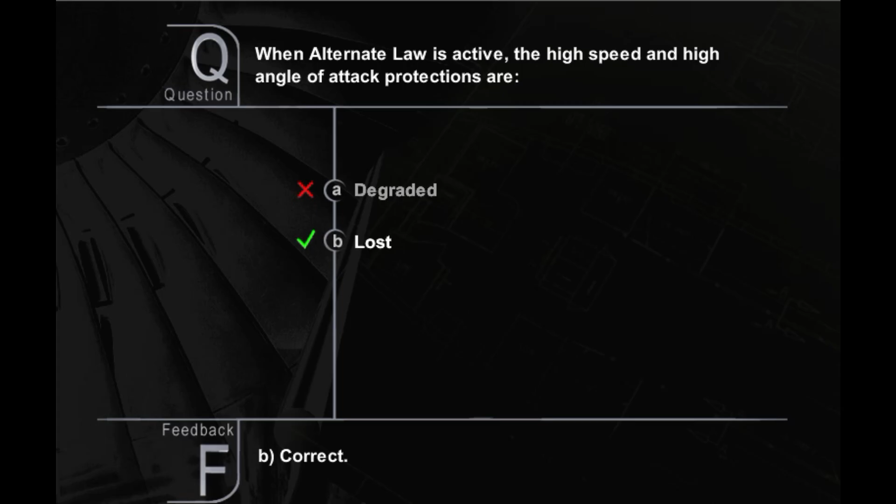The max flap slat speed for flaps 1 is 230 knots. For flaps 1 plus F, 215 knots. For flaps 2, 200 knots. For flaps 3, 185 knots. And for flaps full, 177 knots.

Once a flap selection has been made, VFE, the max flap extension speed for that configuration, is represented by the red and black strip on the PFD. VFE next, the maximum speed at which the next greater flap selection can be made, is represented on the PFD speed scale by a pair of amber bars. Slow to less than this speed before making the next flap selection.

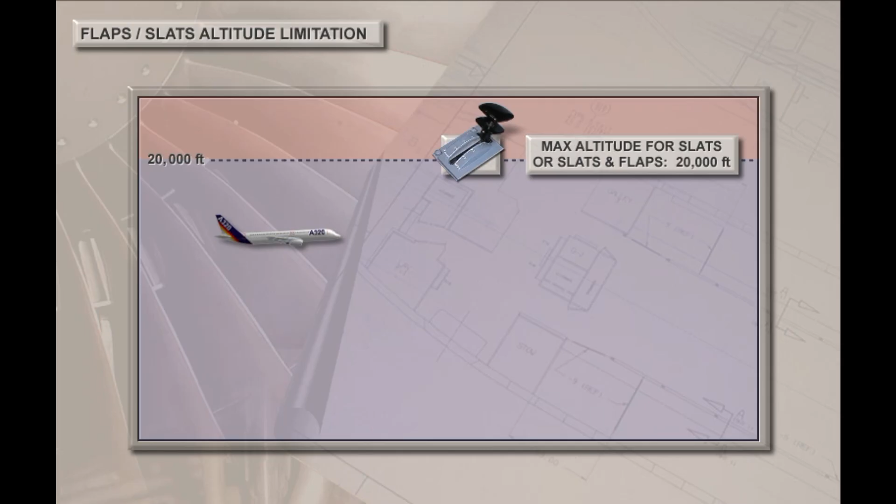The maximum altitude for slats, or slats and flaps extension, is 20,000 feet. For speed brake operation, there is no altitude limitation. However, for passenger comfort, it is not recommended to use speed brakes above 25,000 feet due to the higher than normal change in cabin pressurization that would occur.

When performing the configuration safety check, confirm on the upper ECAM flap position indicator that flap position is in agreement with the flaps lever. Also check the position of the speed brake lever. If the flaps are not in the 0 position or the speed brake lever is not in the retract position, contact maintenance. Do not apply hydraulic power or move any flight control surface without first obtaining maintenance clearance.

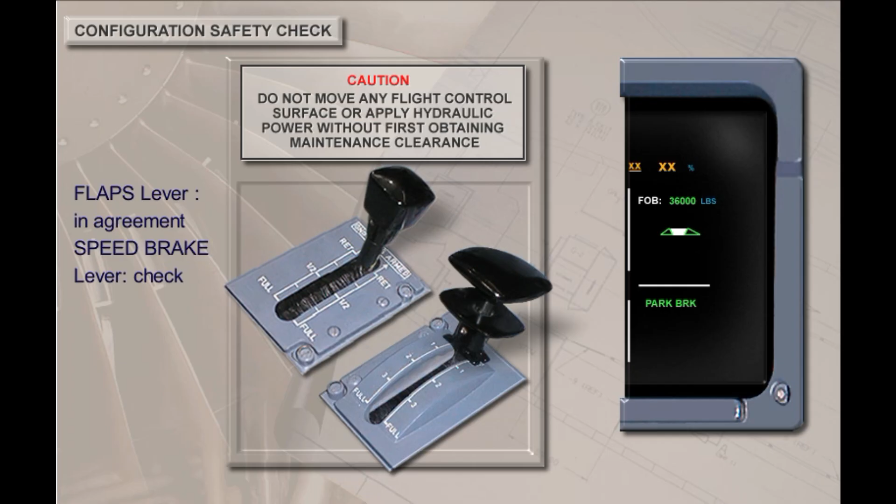During the cockpit geographic check, confirm that all flight control computer switch lights are out on the left and right overhead panels. On the glare shield panel, ensure both captain's and first officer's side stick priority lights are out.

The pitch trim wheels should be at 0. They were reset to 0 at the last landing. Caution: never attempt to move the trim wheel without hydraulic pressure.

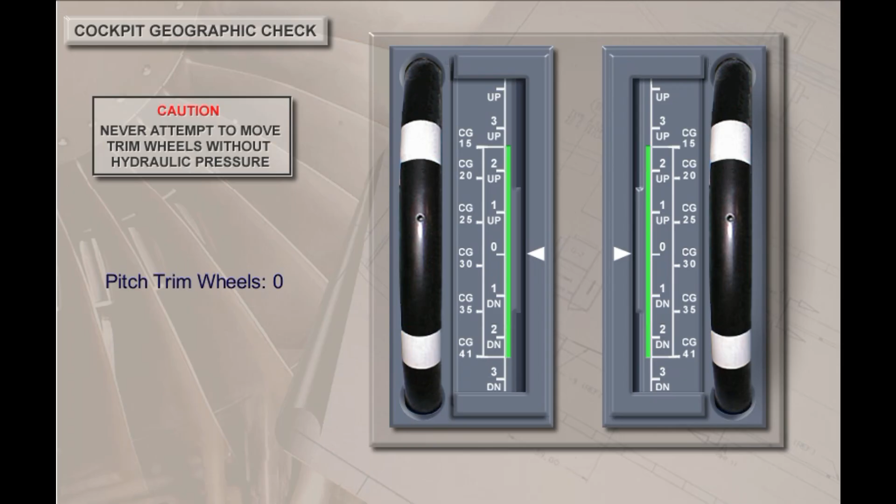On the center pedestal, again ensure the speed brake lever is in the retract position and the flaps lever is in agreement with the ECAM flap position indicator. Normally the flaps will be in the 0 retracted position.

The rudder trim rotary switch should be centered. Push the reset button to ensure the rudder trim is zeroed and confirm the position indicator is 0, plus or minus 0.8 degrees.

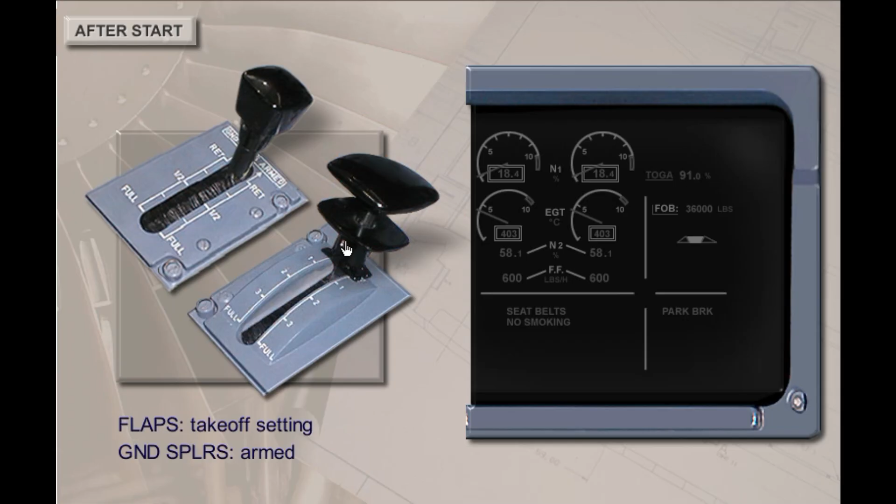As part of the after-start recall scan flow, the captain selects the desired takeoff flap setting and arms the ground spoilers. Touch the flaps lever to select the takeoff flap, then touch the speed brake lever to arm the spoilers. The flap position is confirmed on the ECAM flap position indicator, and the message 'Ground spoilers armed' appears in the memo section of the upper ECAM. If 2 minutes has elapsed since the second engine start, the takeoff memo appears, indicating spoilers armed.

Taxiing out, clear of congested areas, the captain calls for the before takeoff check. The first officer then initiates the flight control check. Movement of the side stick automatically brings up the ECAM flight control page. The first officer checks each control surface on their respective control position indicator, pausing momentarily to confirm full travel.

This check includes the 5-degree aileron droop with the flaps extended. He also confirms full side stick movement by observing the limit indices on the PFD. The sequence is side stick left, check, right, check, forward, check, aft, check.

Note: when moving the side stick during the control check, do not move the side stick any faster than required for a normal flight maneuver to minimize component wear. This is particularly important during extremely cold conditions. Touch the side stick to perform the control check.

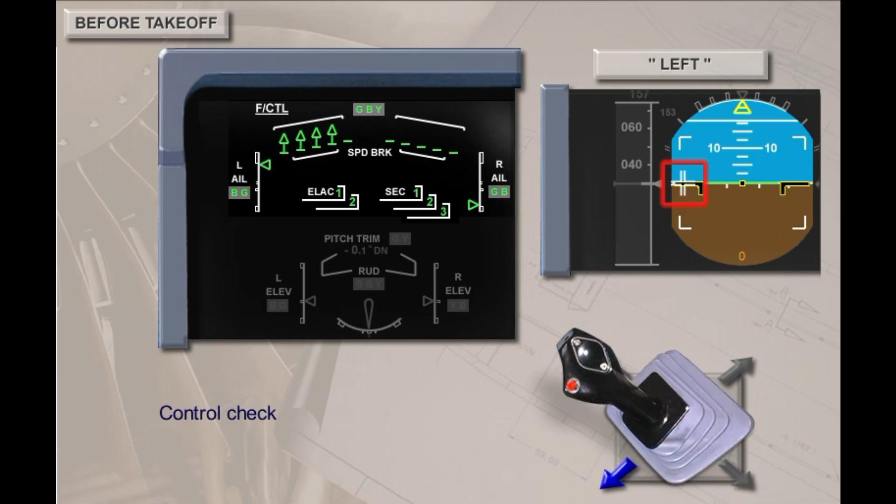The first officer, after completing his portion of the flight control check, announces that he is ready for the rudder check, which is performed by the captain. The captain depresses the pedal disconnect button on the steering handwheel, then moves the rudder pedals in both directions. The first officer, while following through on his own rudder pedals, observes full rudder travel on the ECAM.

Touch the pedal's disconnect button, then the left rudder pedal to start the rudder check.

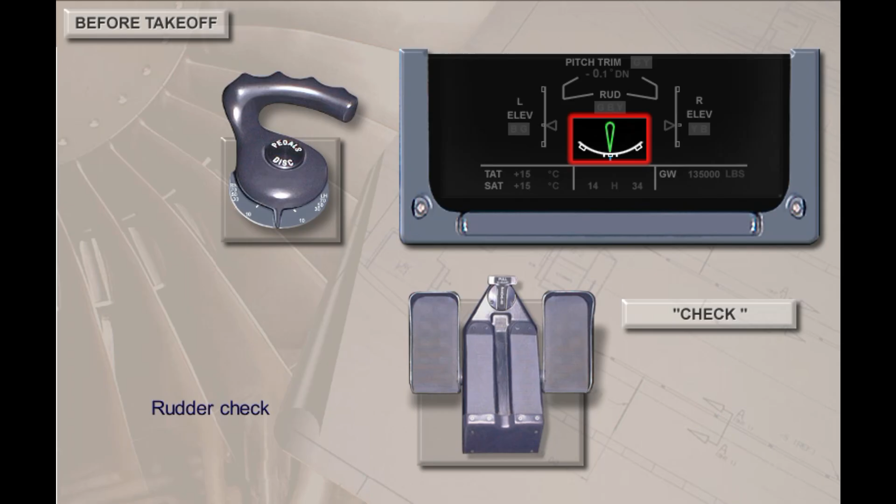The captain also checks for full and free movement of his own side stick by moving it either left or right, and either fore or aft, and confirms the side stick controller against the ECAM flight control page. This is a silent check.

The first officer sets the pitch trim from the load closeout data and observes this setting on the ECAM flight control page. In addition, rudder trim is confirmed to be at 0.

During the takeoff roll, control deflection is in direct proportion to side stick movement. When takeoff power is applied, half travel forward side stick input should be applied to prevent the nose from pitching up. At 80 knots, gradually reduce this pressure to reach stick neutral at 100 knots.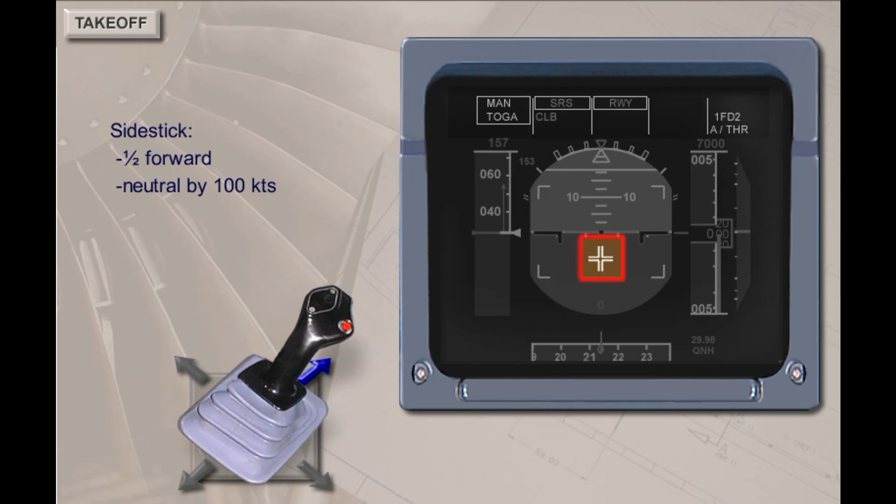Routine use of lateral inputs to counter the effects of crosswind is not recommended. For crosswinds over 15 knots, small amounts of lateral inputs may be used to maintain wings level. Too much results in excess spoiler deployment, which has the effect of increasing the tendency of the aircraft to turn into wind, reducing lift and increasing drag.

At VR, smoothly rotate the aircraft into the pitch command bar. At liftoff, as the aircraft transitions to flight mode, any lateral inputs used to counter the effects of strong crosswind must be relaxed to prevent the aircraft from rolling and to maintain wings level. This ensures a smooth transition to flight mode. Remember, in flight, lateral sidestick inputs demand roll rate.

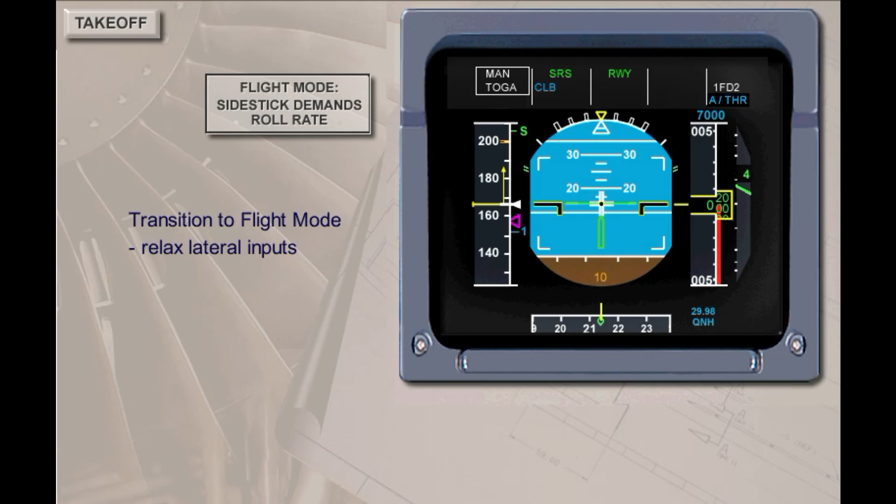When the acceleration altitude is reached, the flaps and slats are retracted. If takeoff was performed with flaps 2 or 3, select flaps 1 at F speed, the minimum speed for flap retraction. Then select flaps up at S speed, the minimum speed at which the slats may be retracted. If takeoff was performed with flaps 1 plus F, they are selected up at S speed.

Touch the flaps lever to select the flaps up. Once the flaps are up, the PNF announces 'flaps up.'

The after takeoff check is then requested by the pilot flying as soon as practical, after the flaps are up. The PNF disarms the spoilers by pressing straight down on the speed brake lever. Disarm the spoilers, then touch the right arrow to continue.

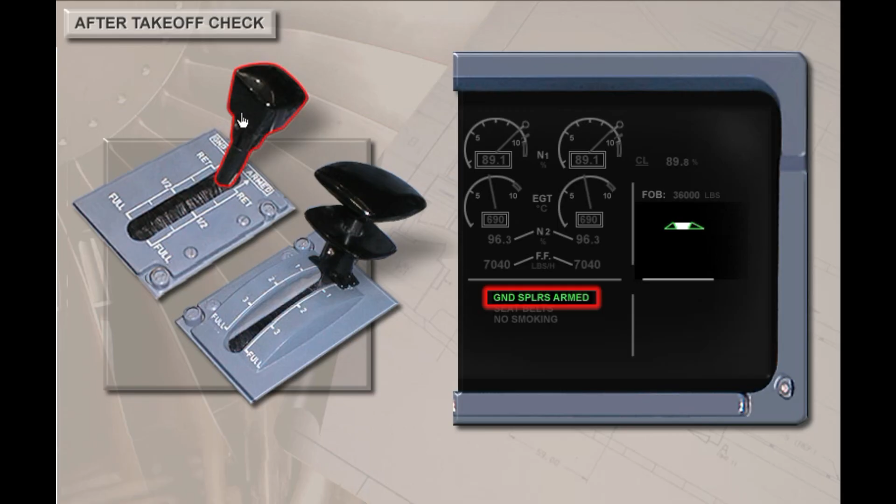FMGC computed speeds default to flaps full. If a landing in Config 3 is desired, line select Config 3 on the MCDU Performance Approach page so that all FMGC computed speeds displayed are for the correct configuration. Line select Config 3.

Also on the overhead GPWS panel, select Landing Flap 3 to prevent nuisance flap warnings close to the ground. GPWS Flap 3 is displayed on the ECAM memo section. Select Landing Flaps 3, then touch the right arrow to continue.

In a managed descent, if the aircraft becomes high on the profile, the message 'more drag' is displayed on the PFD. Extend the speed brakes to the half position until the profile is regained.

On approach, the pilot flying calls for flap selections at the appropriate speeds. At green dot speed, select flap 1. In managed speed, the aircraft decelerates to S speed. Touch the flap lever to select flap 1, then touch the right arrow to continue.

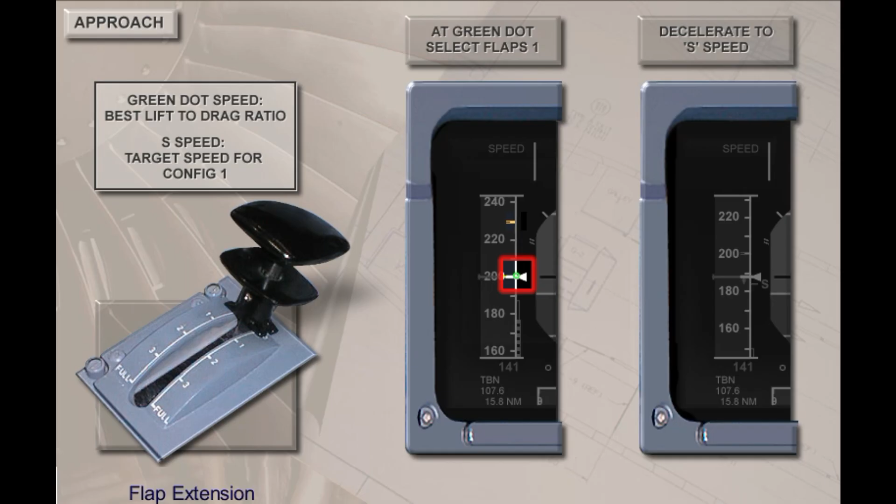Touch the flaps lever to select flaps 2. When flaps 2 is selected, the aircraft decelerates to F speed.

At the appropriate time, the pilot flying calls gear down, landing check. The PNF arms the spoilers by pulling straight up on the speed brake lever and reads the landing check. Touch the speed brake lever to arm the spoilers, then touch the right arrow to continue.

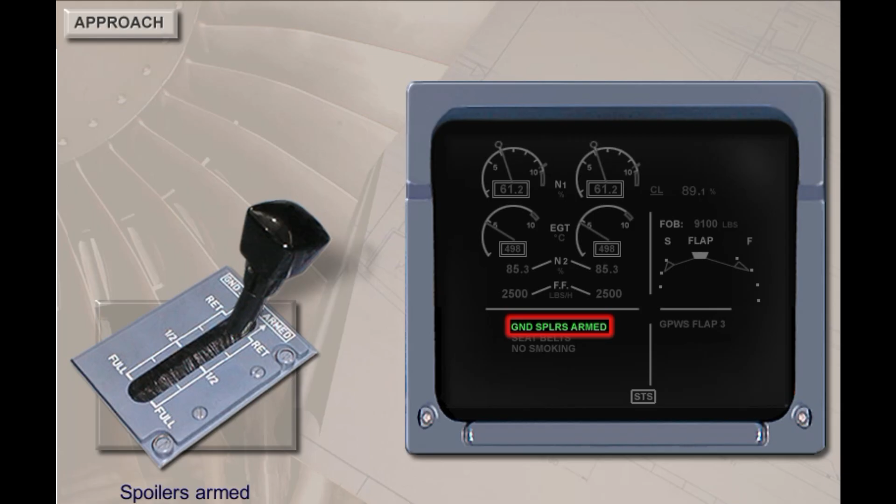Touch the flaps lever to select flap 3 and decelerate towards V-app. If a flaps full landing was planned, select flaps full.

At approximately 20 feet, perform the flare maneuver by pulling back gently on the side stick to counteract the induced pitch down input.

In a crosswind, the preferred technique is to use rudder to align the aircraft with the runway. If the input is gentle, very little if any lateral control is required. Remember, side stick input in flight demands roll rate.

At touchdown, gently lower the nose. The ground spoilers will extend, if armed, when the aircraft touches down and the thrust levers are reduced to idle. The PNF confirms ground spoiler deployment on the ECAM wheel page, which was automatically displayed upon gear extension.

If the ground spoilers do not extend automatically and the landing was made with flaps full, they cannot be extended manually. If the landing was made with flaps 3, it is possible to extend the flight spoilers only by moving the speed brake lever aft.

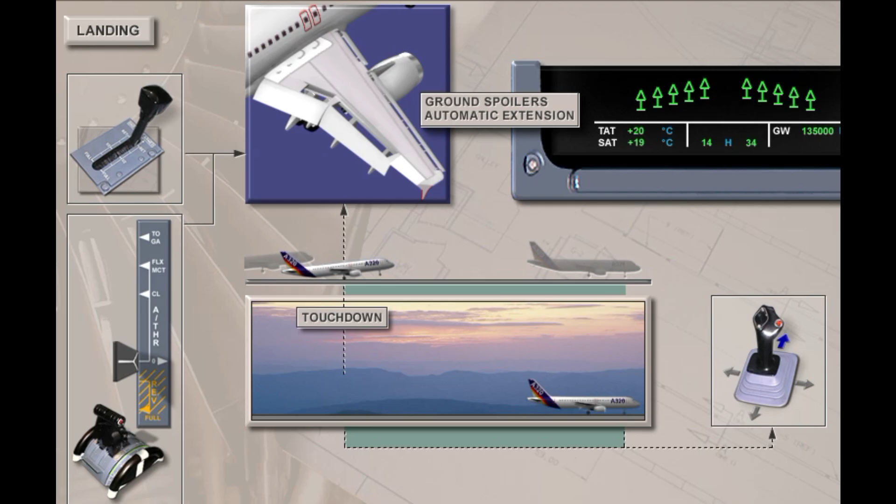The after-landing check calls for the flaps up. Slats flaps should be left in their landing position if the approach was made in icing conditions or following a landing on an ice, snow, or slush-contaminated runway. Touch the flaps lever, then touch the right arrow to continue.

Disarm the ground spoilers by pressing straight down on the speed brake lever.

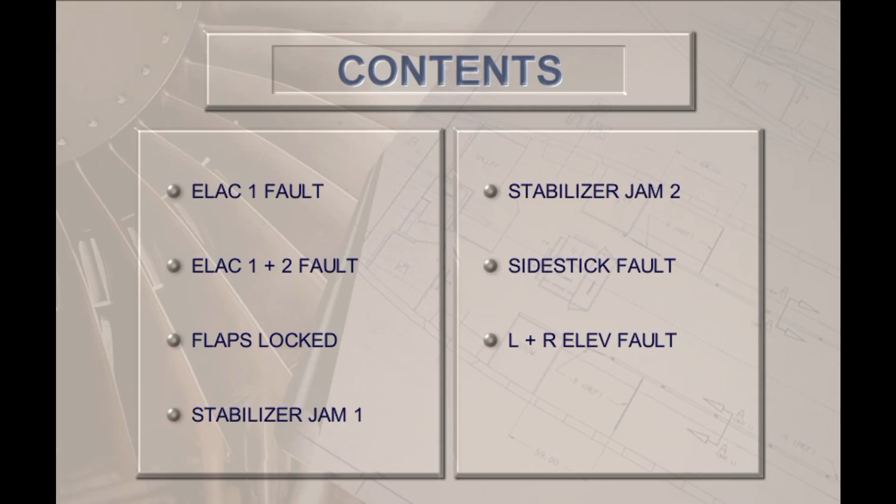A fault in a single flight control computer requires that it be switched off, then on again, to attempt a reset. The other computer assumes the functions of the failed computer, except for a SEC failure, where the associated spoilers will be lost. Caution: do not reset an ELAC if uncommanded maneuvers occurred during the flight.

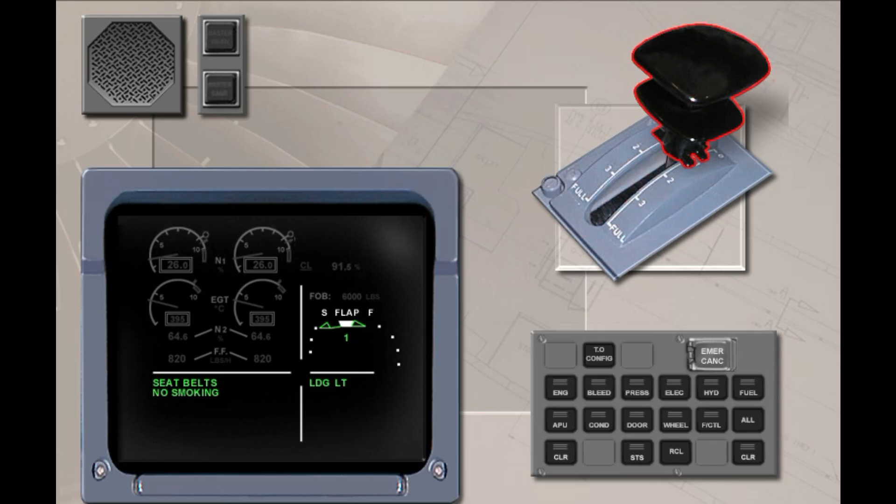Recall that due to flaps or slats asymmetry, runaway, or uncommanded movement, the wingtip brakes are activated and the flaps and/or slats are locked in their current position. The wingtip brakes can only be reset on the ground.

In this example, the flaps have locked between positions 1 and 2. The flaps locked caution is generated, along with the master caution and single chime. ECAM advises that the wingtip brakes are on and displays the maximum flap extension speed for the current flaps lever position. This speed is also represented by the red and black max speed strip on the PFD speed scale. Clear flight controls by pressing the Clear button on the ECAM control panel.

The status page indicates that flap 3 is to be used for landing. The approach speed additive is added to the VLS speed as displayed on the MCDU approach page and is manually entered by typing it into the scratch pad, then line selecting it into the VApp field.

The landing distance must be increased due to the higher approach speed and loss of aerodynamic braking from the flaps. If a diversion was necessary, consider increased fuel consumption to the diversion airport. Refer to FCOM 3.02.10 operating techniques, which gives landing, go-around, and diversion procedures and fuel consumption guidelines. Clear status by pressing the Clear button on the ECAM control panel.

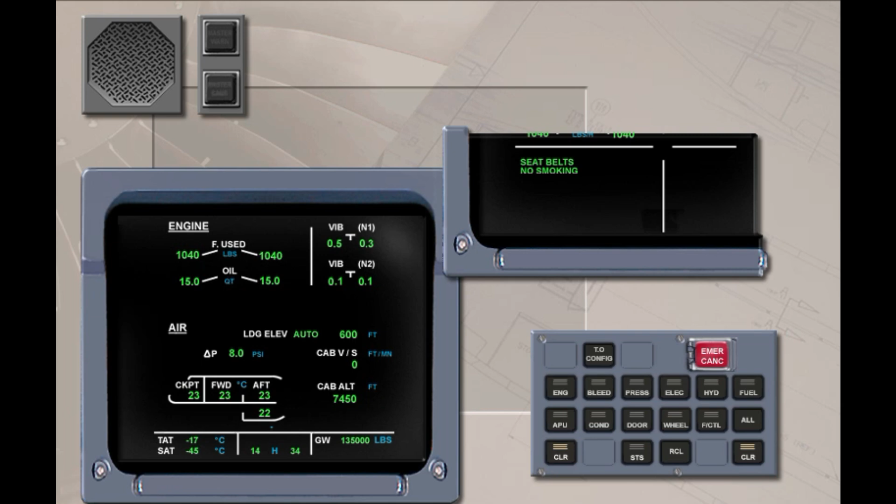With a jammed stabilizer, the ECAM procedure recommends checking the manual pitch trim and if it is available, trim the aircraft to maintain neutral elevator as indicated on the flight control page.

Alternate law becomes active and the autopilot is not available. However, on the A320, control is much easier than on a conventional aircraft because in alternate pitch law, the flight control computers will deflect the elevators in order to maintain 1G with the side stick neutral. Clear flight controls by pressing the clear button on the ECAM control panel.

Flaps 3 is used for landing, and if manual pitch trim is not available, landing gear extension is delayed until the flaps are in config 3 and the speed is reduced back to VApp. This is because once the landing gear is down, direct law becomes active, and although the previous elevator position is maintained, any further speed and configuration changes would require constant side stick pressure. Control forces, however, will be light due to the lack of an artificial feel system.

The approach speed must be modified to VREF plus 10 on the MCDU approach page, and a landing distance factor must be applied to the landing distance. Whenever this factor is not displayed on ECAM, it can be found in FCOM 3.02.80 Miscellaneous Procedures or in the QRH.

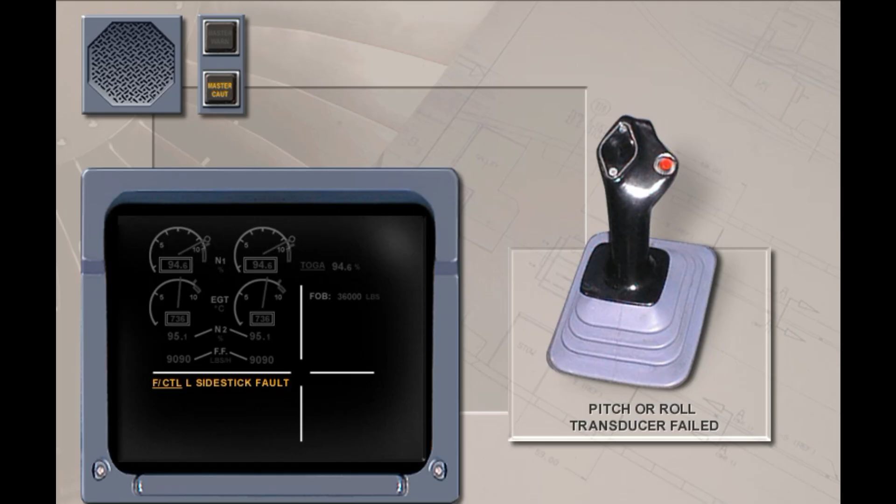With the loss of both elevators, only manual pitch trim is available for pitch control. As well as the ECAM warning, the message Manual Pitch Trim Only is displayed on the PFDs. Do not use the speed brakes because of the induced pitch changes, which may be difficult to control with manual pitch trim only. Clear flight controls by pressing the clear button on the ECAM control panel.

The status page outlines the approach procedures and reminds the pilot that pitch control is mechanical backup and roll control is direct law. Clear status by pressing the clear button on the ECAM control panel.